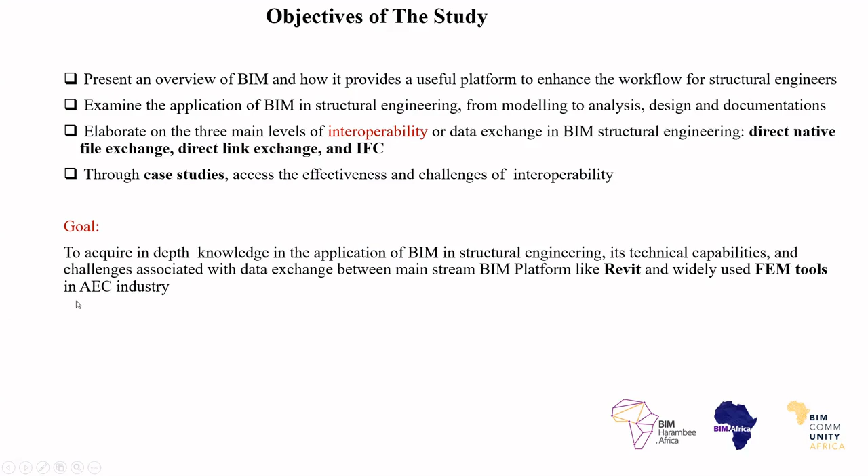Through the case studies, we will assess the effectiveness and challenges of interoperability. The goal of the project is to acquire in-depth knowledge in the application of BIM in structural engineering, its technical capabilities, and the challenges associated with data exchange between mainstream BIM platforms like Revit and widely used FEM tools in the AEC industry — AEC representing architectural, engineering, and construction.

Methodology: the methodology is based on data exchange. So what are we going to do? We are going to see how to build a Revit model from a structural engineering point of view, or how you get a model from an architect as a structural engineer, and pass this model to a FEM solution or structural design software like SOFiSTiK. We use RFEM and SCIA Engineer to demonstrate this.

What method of interoperability are we going to use? We use the direct link, meaning these software are directly connected to Autodesk Revit. So within Revit, on one platform, you are able to perform multiple analyses. This is really beautiful, the beauty of BIM. Previously, this was not possible. This is the methodology used in this project and how to move from one place to another, as you will see as we go along.

And what is BIM? A lot of people have already spoken about this, so I'm not going to waste a lot of time on it. There is a specific definition of BIM that is very catchy, attractive and innovative, and it encompasses all of the definitions of BIM in just one paragraph or sentence.

This definition is proposed by Jerry Laiserin, a building information modeling enthusiast, who says that BIM creates and maintains in real time multi-dimensional data-rich views through a project's lifecycle to support communication. BIM helps to support communication. What does that mean? It helps to share information, so I share my information with the architect or the MEP engineers or the facility manager.

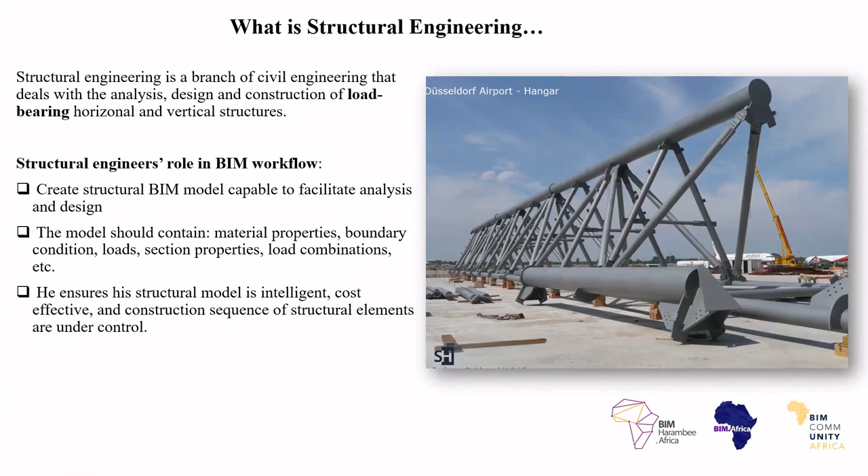He will be the one who creates the structural model capable enough to facilitate analysis and design. His model should contain key structural parameters like material properties, boundary conditions, loads, section properties, load combinations, etc. We'll talk more about this later. He should ensure that his structural model is intelligent, cost-effective, and that the construction sequence of the structural elements is well under control.

Having said that, this is mainly his role in the design process. He can get the drawings from the architects, takes the drawing, and then based on the structure he wants to design—whether it's a concrete structure or a steel structure—he analyzes the materials and assigns material parameters and properties to it based on the code.

With his knowledge and experience, and also the situation where the structure is located, he's able to assign loads and analyze these loads through mathematical models and formulations. He is able to define or determine the internal forces—these are internal forces such as the moments, the shear force, the normal force, and the torsion or torque. Once you do these things, they are done through analysis in the software.

Sometimes it can be done through hand calculation, just as a backup. Then you will need to do verification. Some verifications of the structural elements will be done. These verifications are like designing your structure.

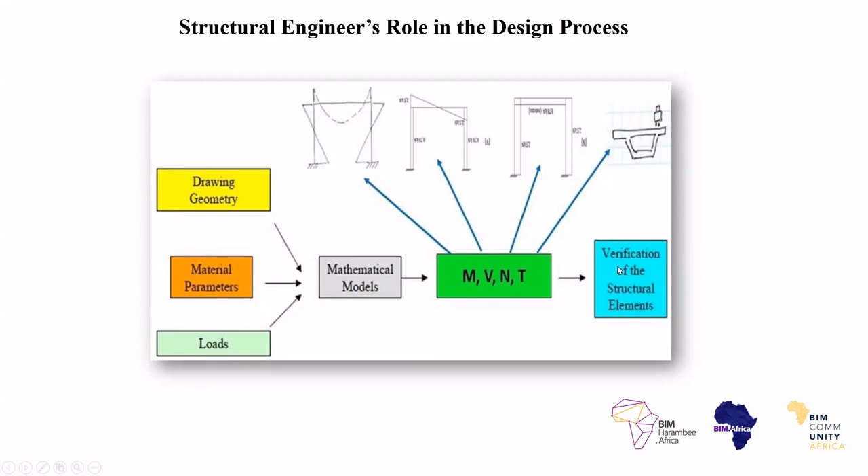Structural design is like resistance versus action. If you push me, I should be able to put up enough resistance—my resistance must be more than your action. Once my resistance is more than your action, it means my structure is well fit. So he compares the resistance against the action, and the resistance must always be greater than the action. This can be verified through the codes, through experience, through training, teaching, and everything.

Before we go further, the last thing we would like to define and clearly understand is FEM, finite element modeling—the word finite meaning small particle. This is at the heart of structural calculations and analysis. All of the computer programs you see are based on finite element modeling. FEM is one of three methods structural engineers generally use to determine internal forces and moments of a structural system.

Generally, there are three main methods. There's the force method, used to determine internal forces or displacement of the system. You have the displacement method, which is the FEM, and you have the reduction method, which is also based on FEM. The displacement method is the backbone of most computer software—the tools you see out there are based on the displacement method.

So a good number of structural engineering software tools are based on the principles of FEM, or finite element modeling. So it is very important—that's why it's very important—for a user of the software to understand the underlying principles behind the governing equations, the mathematics, and the mechanics of how the structural software computes internal forces using FEM.

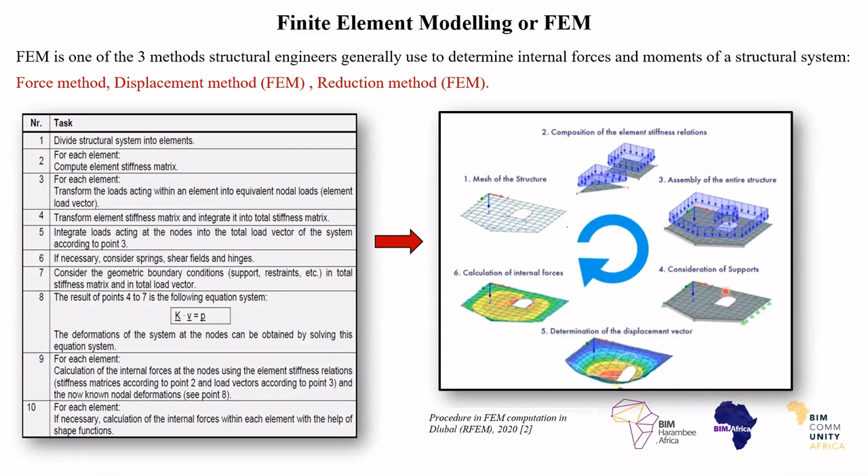So basically, this is just a little overview of finite element. To learn about this requires a huge amount of time, this takes a whole semester to learn in universities. So normally, people in structural engineering, mechanical engineers, even sometimes electrical engineers, most of their calculations are based on finite element method. It's a very wide field.

Then we would like to talk about interoperability. This is very important. What is interoperability in the midst of all of these we are discussing here? Interoperability, as the word entails, what is it? What kind of system? What kind of interoperability? How is it achieved?

Let's look at the word itself, not the definition, but just the word interoperability. The word inter means between two groups. Operability means things are able to operate, in just a literal sense. Another way to look at it is the ability to keep a piece of equipment or system, or the whole industrial installation, in a safe and reliable functioning condition according to predefined requirements.

So when you combine both, you get this definition presented by the ISO standard, which says the ability of two or more systems or components to exchange information and to use the information that has been exchanged. It's not just exchanging the information, I must be able to use the information that I exchange. Otherwise, it's irrelevant. When an architect gave me his model, I should be able to use that model to alter the models and do my structural calculations. If I cannot, then interoperability does not exist.

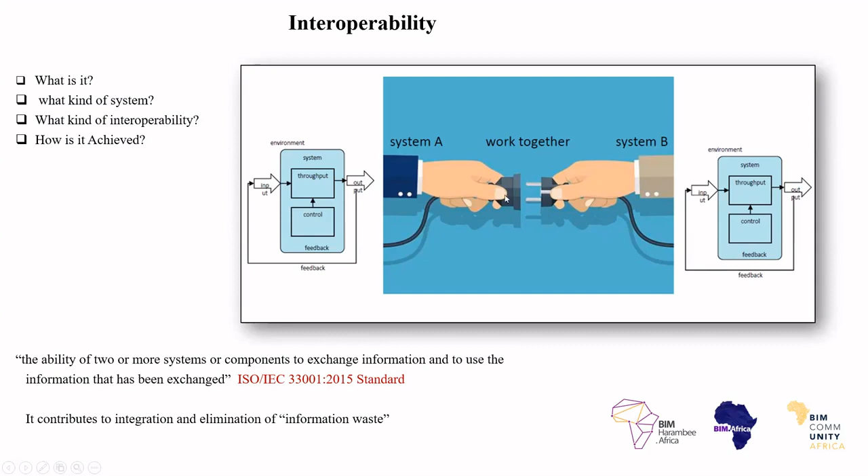It should contribute to integration and elimination of information waste. So as you can see here, system A works together with system B, and they are able to exchange information and they use that information.

Interoperability is a generic term. Every domain, every discipline has a way to define what interoperability really is. It depends on how you look at it. For BIM structural engineering, we're going to look at the various levels of interoperability later on, but it has multiple dimensions, like 3 dimensions: the kinds of methods, the kind of system, and the kind of interoperability.

The kind of system we'll be talking about is non-technical interoperability and technical interoperability. Technical interoperability will be information system, that's the classical one. And the non-technical one would be like business, interoperability between business, organization, project, people, how they operate.

And maybe the next one, the kind of interoperability, has to do with semantic, the data connection. This is what we will be talking about more, how to exchange one data, the structural data, the syntactic, the connection data, and all of this.

And the kinds of methods has to do with which method you use to achieve interoperability, like openness, machine readability, industrial standards like the IFC, like the PDF documents you use. All of these are methods that give you interoperability. And then you have the ISO STEP physical files and all of these.

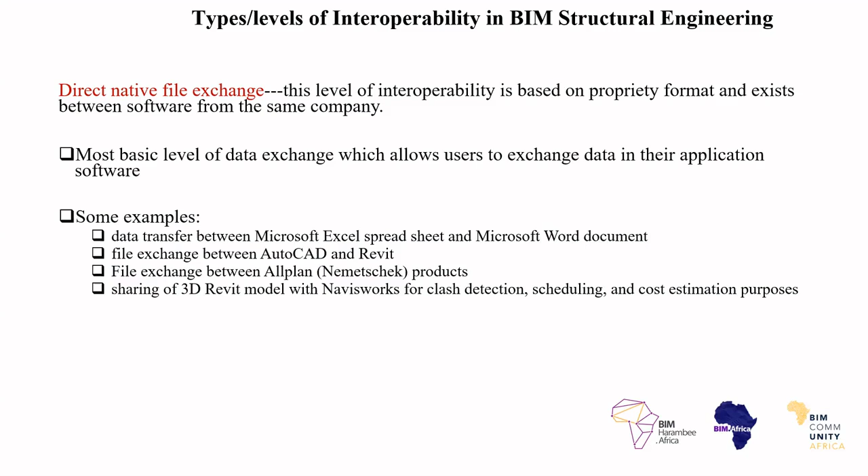And this is the most basic level of exchange, which allows the users to exchange data in their application software. But one of the main disadvantages of this interoperability is that it requires a repetitive process, which makes changes to the models very difficult. And at this level of interoperability, when you have a huge project, it's really a problem. So we go to the next one.

The next one is the direct data exchange, which is the bidirectional or round tripping engineering. This is very good. This is the one where the structural model data is directly shared or exchanged between a BIM authoring tool.

Let's underline this word, BIM authoring tool, and an FEM software tool. What is that? BIM authoring tools are something like Autodesk, Tekla, maybe Tekla and ArchiCAD. If you are able to take your model from one of these and send it to an FEM or structural engineering software and perform analysis, what you are doing there is direct link data exchange or round tripping. You're going to see a lot of this in the case study.

This is the backbone of this research. This research is trying to analyze, to understand the advantages and disadvantages of this method to a structural engineer, the fidelity, how important when you exchange the data, how this data can maintain their fidelity, that they are not able to be compromised. We're going to see this later.

Studies have shown that this level of data exchange is the most effective and efficient method for BIM structural engineering up to date. It provides an interface for two independent software programs to exchange construction data in real time. This is really good. You're going to see this.

Some examples are when you exchange your data Revit to Sofistik, Revit to Tekla, Revit to Dlubal, which is RFEM, Revit to SAP, Revit to Autodesk Robot, Revit to SCIA Engineer, Revit to Allplan, for example, or ArchiCAD to any of these. When you do that, you are talking about direct link data exchange.

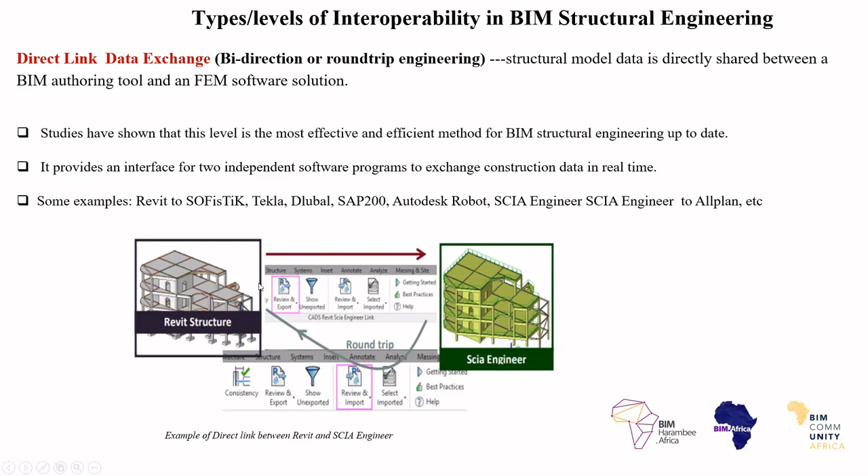For example, as you can see here, you have the Revit model, and then right within the Revit platform, you exchange the data to SCIA Engineer and perform your analysis. You are able to bring your data back, query it, make some changes, and bring it back again. This is what we call round tripping. We will see more of this.

And then the next one we talk about, which has been highly discussed by most people, is the IFC, which is the Industry Foundation Class. This is an open standard system that promotes vendor neutral and usable capability across a wide range of hardware devices, software platforms.

This one is basically like sharing my file with someone else who also has a BIM tool that is able to read this file. This one is neutral. You don't need to buy anything, just exchange your data. This is developed by the International Alliance for Interoperability. The open nature of the IFC allows the file to be read by any CAD software which has the IFC export and import functionalities. And this is really good.

This is good for coordination, especially for the structural engineering part. The disadvantage of this for the structural engineer is that IFC is mainly used for coordination purposes, but not for structural analysis because of its low capabilities in transferring structural properties and data.

Yes, I can use my structural model and convert it to IFC and send it to the architect in my office or in other companies, or to the contractor. He can only take the model for coordination purposes. But when he gives me his model, for example the architect's model, I'm not able to use that model to perform structural analysis in reality, because the IFC doesn't really work well for that. There's currently still a problem, and this research was able to unveil that there's still a problem with the load combinations.

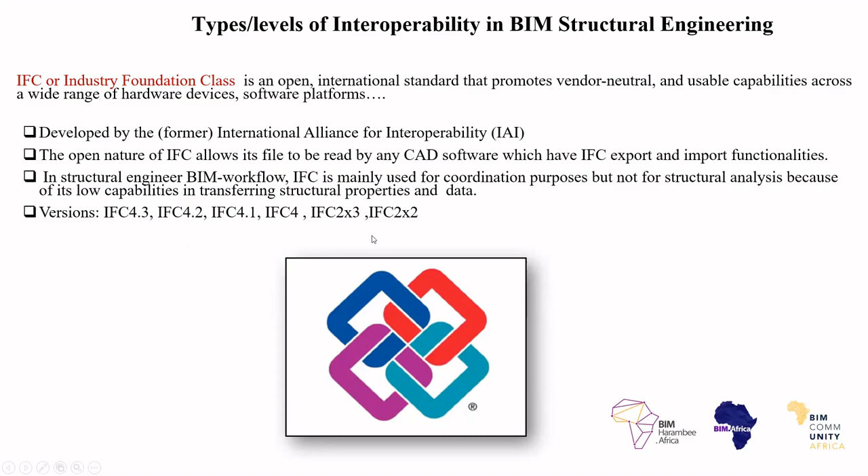We're not going to go into all of this detail, but this is an example of IFC file exchange I did some time ago. This is a frame system. I did it in Revit, then converted it to an IFC file, and went to ArchiCAD to see what happens. I exported it from Revit and opened it in ArchiCAD. This is what happens.

This is what I saw. As you can see, if I was exchanging this with an architect, he was going to be able to see it, and I could tell the architect, oh, there's a problem with the column, the thickness, there's a problem. Then the architect could make the changes and send it back to me. When I see that change, I can modify it and do my structural calculations without the IFC anyway. So this is just an example.

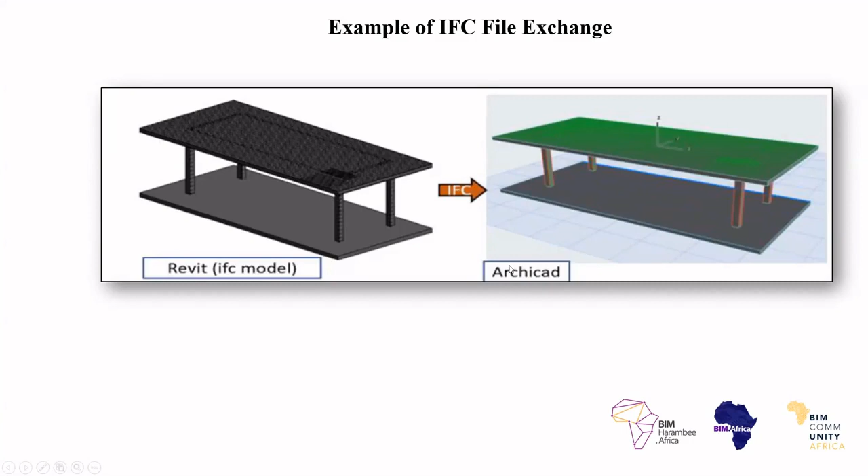So this is what happened. There has been significant improvement in data exchange in the AEC industry. Could you imagine this chaos? These bidirectional exchanges between architects and structural engineers, you change it, send it this way, bring it back - this is really chaotic. This was some years ago. But now with BIM, open BIM, IFC, everything has been synchronized and integrated. You are just able to have one database and exchange all of this information. Very good stuff.

BIM in structural engineering - there are BIM uses. What is BIM use? BIM use refers to the way in which the concept of building information modeling is applied or used in each specialist domain within the project life cycle. The way an architect uses BIM is a little different from the way a facility manager will use it, and a structural engineer will use it.

The way you use it - maybe the architect uses BIM for energy analysis, maybe he uses it for facility management. The guy in facility management uses it to keep track of the facility.

The structural engineer's BIM uses - as identified, there are many BIM uses, but we are able to identify three key BIM uses for a structural engineer: one is interdisciplinary coordination, project documentation including producing construction drawings, and structural analysis and design through third-party analysis, plugins, or direct link.

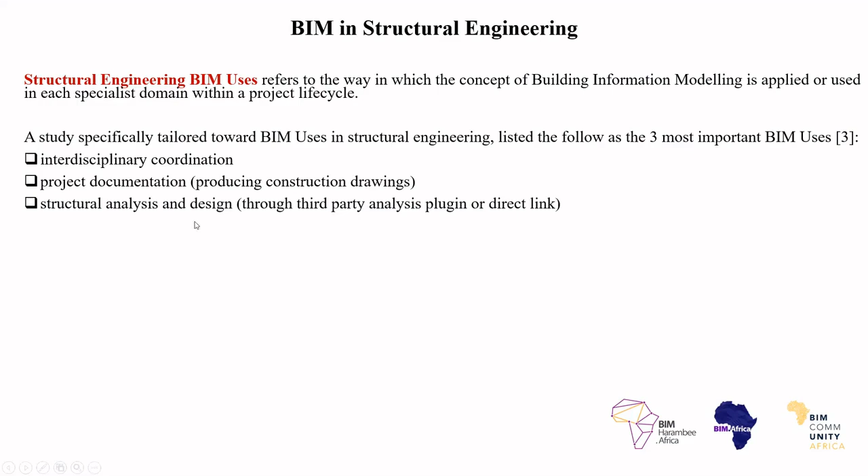For structural analysis and design, we're going to see this - this is going to be our focus. You're going to see how this works.

And structural BIM models - there are two types of structural BIM models: the physical model versus the analytical model. The structural BIM model is the central data that you establish in Revit or in ArchiCAD. In Revit, you build your models and then populate your models with data - for example, your column and everything, your beam, your slab - you have all of your metadata, all of the information about that column. Anybody who comes and clicks on it can see all of that information. This is all the central data, which is the structural BIM model.

But then what will be the physical model? The physical model represents the exact geometry of the structural members.

It is a model void of the architecture and MEP elements of a BIM model. That is, when you take away the MEP, the electrical and mechanical components, and from the architect side, you don't need the windows or the doors as a structural engineer. All you need is the structural elements, the physical component that you're going to do your analysis with. That's the model left when we extract the load bearing structural components of the structure.

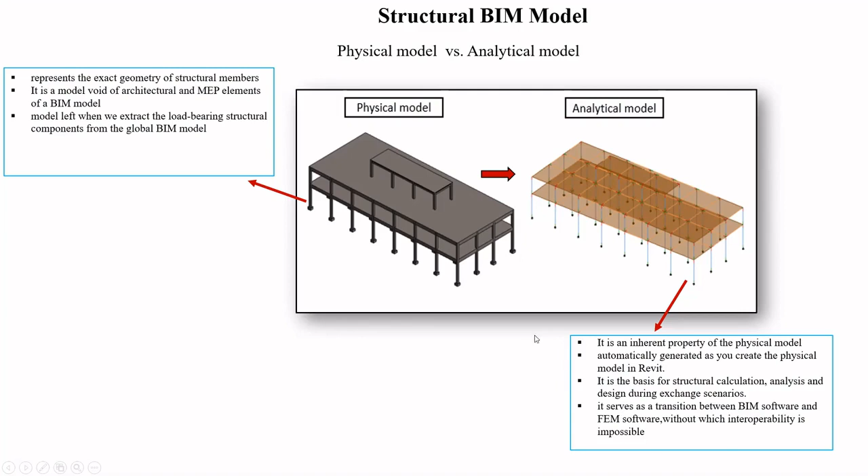In Revit, when you are creating the physical model, you have to be cautious and use the template. When you use the structural templates in Revit, as you are creating the physical model, it is automatically creating the analytical model. And it is this analytical model you're going to use to perform your structural analysis, and this is what you're going to transfer to the FEM software or the structural engineering software. So that's why we say it is the transition between the BIM software and the FEM software. Without this, interoperability is impossible. It is the basis for structural calculations, analysis, and design during the exchange.

Then the next thing we want to talk about is structural engineering BIM workflow. The workflow, how do you perform your workflow? How do you start, what do you start with, continue with, and end with? Normally there are a lot of workflows out there. Your company or institution can establish their own workflow, but basically from the structural engineering point of view, this is how it is, so it's just a modification of it. And this is exactly what you're going to see in BIM.

Mostly, you will create your BIM model of the structural elements. From that BIM model, the physical model will be created in Revit. And then from that, automatically, you have an analytical model available for you where all your loads and materials are added. You transfer it to an FEM model, the finite element software. In this model, you are able to perform analysis and design.

Analysis and design are two different things. Analysis is when you compute and calculate the internal forces of the structural element. These are analysis, and then you see what the internal forces are, what the stresses are. Design is when you use those internal forces to design that particular element, for example the slab or the column. You are using the code, and the software is also able to compute that, but then you have to follow specific code guidelines on how to do the design of that structure.

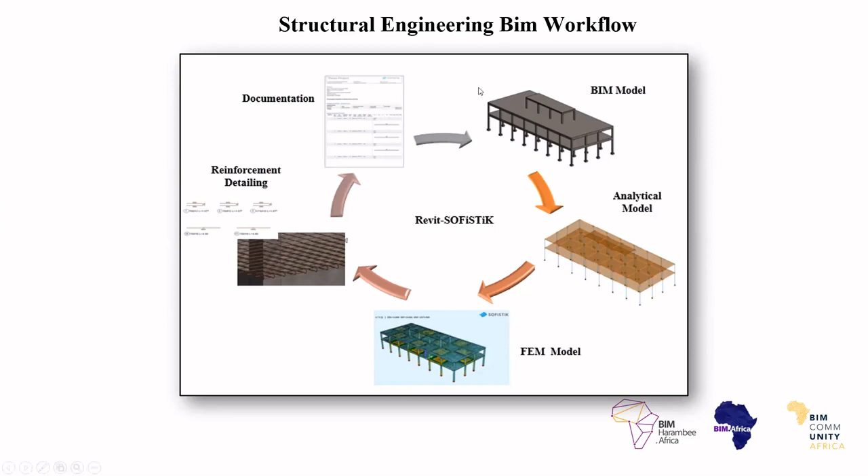When you are done with that, what do you do? Reinforcement generation and detailing, as you can see here. With the reinforcement generation and detailing, you are able to document, do your schedules of reinforcement so that you can send it to the fabricators, or have an idea of your quantities, material takeoffs, and everything. And then the documentation is provided. This can be provided in the cloud, or you can send it to the fabricator for steel, or to the contractor to see what's going on. So this is really, really good. Everything is in a cycle with an integrated model, so you can see everything.

And we will talk briefly about the BIM business process map in BIM structural engineering. This is a business process map. The business process map in the BIM industry typically tells you where, what, how to proceed with your use of BIM. So the process map for this is a process map for a structural design company without BIM. When there is no BIM, see how chaotic it can be.

You get the information from the architect, give it to the senior engineer, and the senior engineer translates it to the junior engineer, and the junior guy translates it to the designer. The designer sends it back to the senior engineer for some modifications, and after all the design, they send it down to the foundation engineer, because the foundation engineer will need the reaction forces from the entire structure to design his foundation. So he has to wait for these guys to finish.

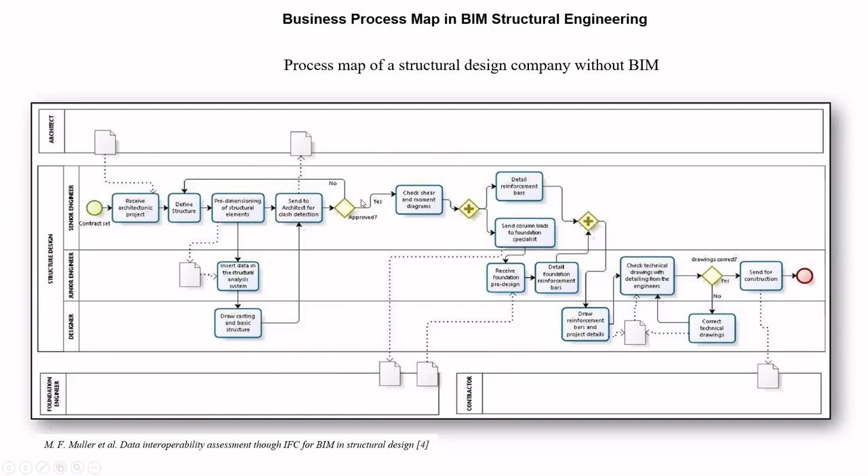So you can see this process, how it's a little bit difficult, but with BIM you have a central data repository. Everybody can see what's going on here, we can work from the repository. The foundation guy can be waiting while this guy completes, but at the same time he's able to determine what's going on and predict how his foundation system will be analyzed. Everybody is in the middle with this BIM repository working with it. This was developed by M. F. Muller in a project data interoperability assessment, but we made some modifications to this.

So the benefits of BIM in structural engineering: we're talking about productivity. Obviously, when you have an integrated system working, you're able to synchronize and you don't have to repeat things. That automatically relates to productivity. Coordination and consistency of data - your data will be streamlined and consistent. You already know what is in, what is out.

Visualization and simulation from the structural engineering point of view. As you see here, you're able to see clearly. I can visualize my reinforcement, I can really see the spacing of the reinforcement - this is really important. And I can simulate my structures to see the behavior, to understand the behavior. Documentation - the projects can be documented in just one system.

In the repository, we are able to document and exploit the analytical model that will be the transition from the BIM to the structural engineering software. BIM is also creating the platform for third-party developers and downstream innovations, like something such as Dynamo. Dynamo, now, when you have a complex geometry, you can use Dynamo, you can use Grasshopper, you can use these tools to prepare the geometry and then send it to Revit, and then do your analysis with it.

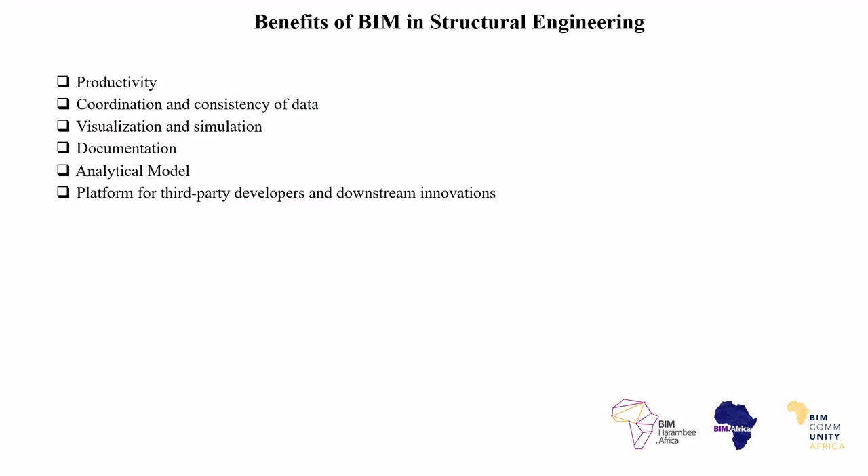And there are many downstream technologies coming up, like SCIA Engineer for structural engineers. It has something we call auto converter - you can convert your structural model automatically, and then you're able to identify mistakes and things. So many things going on there.

Yeah, challenges. Obviously there are some challenges. You have time and resources challenges, and complications with structural engineering - it's a challenging field. The structural engineer must have a good understanding before implementing BIM, otherwise you cannot just have somebody building geometries and models and call it a structural model. If it's not corrected from the beginning, it's going to be really difficult dealing with that, and there's no need for BIM if the model has many errors. It needs constant modifications - yes, you require the knowledge to avoid all of this. Too much knowledge is required.

Analysis links - yes, most of the links work to connect BIM to the FEM software, the structural software, but some still have some problems. These are challenges. It's still not yet seamless.

So we will be presenting 2 case studies, based on direct link interoperability. As I mentioned earlier, we have 3 types of interoperability in BIM structural engineering: native file exchange, direct link interoperability, and IFC. But this project tries to understand the efficacy, the effectiveness, the fidelity of the direct link interoperability - how is it when I put my model in Revit software and send it to a structural engineering software, how does it work? Does it receive all of the data correctly? This is what these 2 case studies are about.

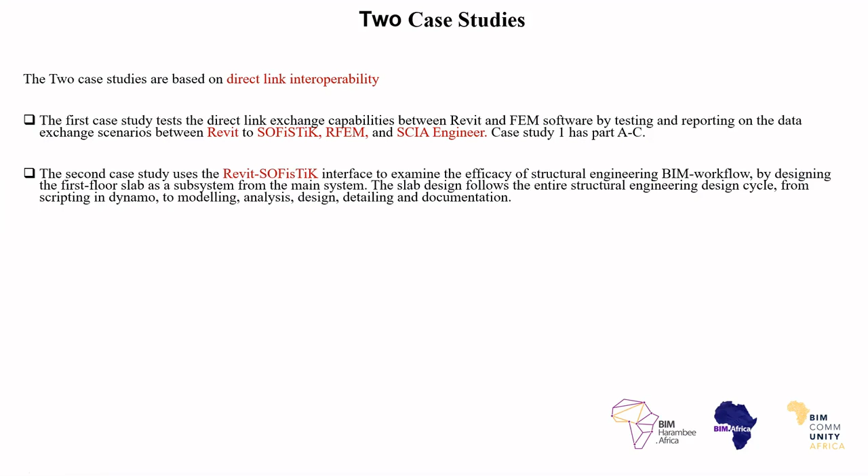So does BIM really work? When you place BIM in the design cycle, does it work? We want to see that. This study wants to try to uncover that. And this is a case study.

It's an office and industrial complex designed for the cigarette manufacturer Philip Morris in Bologna, Italy. The case study was provided by Politecnica Ingegneria e Architettura. They provided me the data, all of the materials to perform an analysis. This building was constructed in 2013 or 14, a few years ago. It is currently in use.

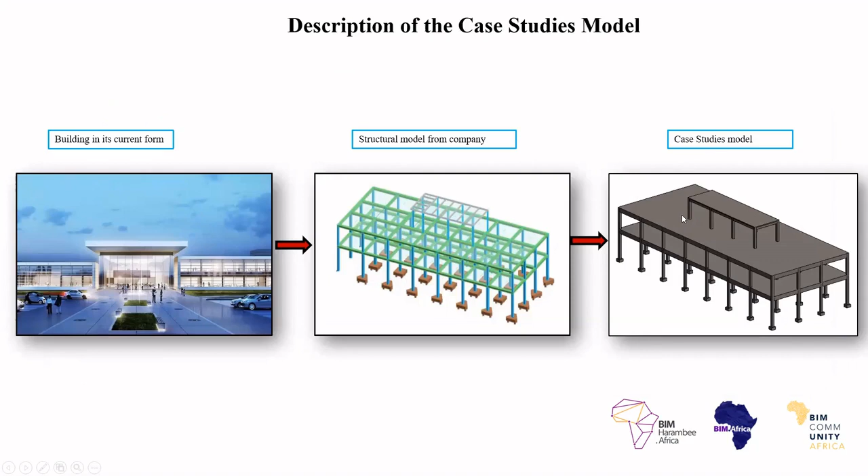This is the building as it is, and this is the model the company created in SAP. They use another software, SAP 2000, and I use another software. This is the case study model I developed in Revit. Later on, I change it with other FEM software, as you will see.

Case study one, from A to C. A has to do with Revit to Sofistik. B, Revit to RFEM. C, Revit to SCIA Engineer.

So what I'm going to do is the Revit model is here, and we exchange it with Sofistik. We observe, we see the changes, whether the Revit model is able to directly exchange this data with Sofistik, and how Sofistik receives this data. What happened? Was there any change? If I take the model from Revit to Sofistik, am I able to use that model? Is it sufficient if I take the model back to Revit? Is it okay to make additional changes and bring it back? What is happening there? We will see in these case studies.

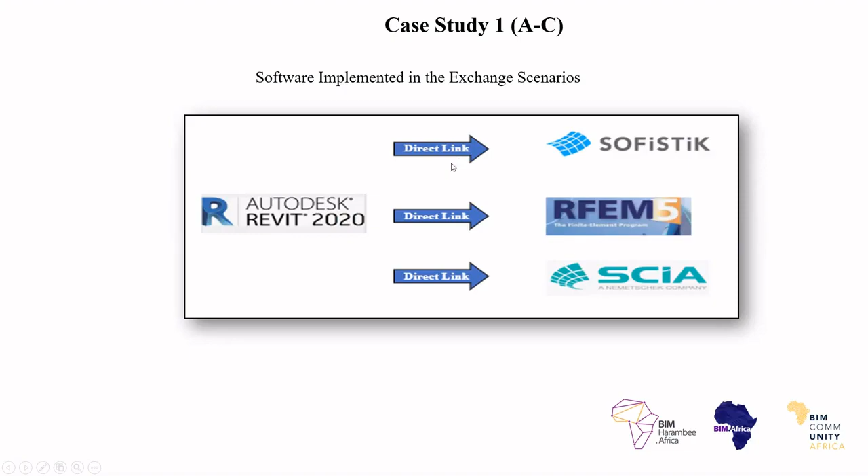This is the basis of this study, as you're going to see along. That's why you have a direct link. We use the direct link. It's not native file or IFC.

Load and boundary conditions populated in Revit. In Revit, as I told you earlier, this is the analytical model, which is the transition. It is this model we're going to send to the FEM software. Now, as you can see, the analytical model is ready with all of the loads applied to it.

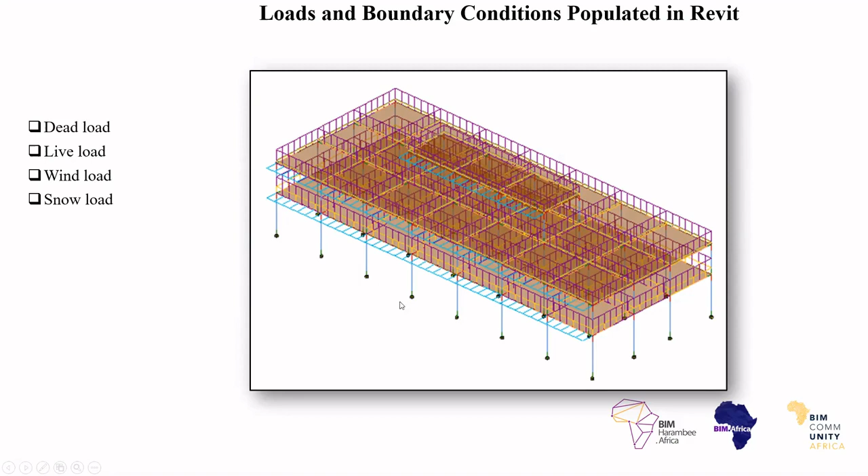But before that, we have to do load combinations. And the load combinations we do are at ultimate limit state according to EC2, which is the Eurocode 2. I did 24 load combinations.

What is load combination? Load combinations in structural design is when you want to design a structural element - this is uncertainty. So you assume that with this structure, so many series of loads will act at the same time, or some loads will act, some will not be present. So you combine all these scenarios like a probability. What's the probability that when everybody is in the hall, what happens? How does the building react? What's the possibility that half of the people in the hall, what happens to the structural element?

The Eurocodes provide provisions to combine all of your loads. When I did a combination, I came up with 24 load combinations, for when the dead load is there, the live load is acting, and then you take a fraction of the accompanying load, the snow or the wind, when the live load is acting. So this is the general formula.

The G stands for dead load. The P should be, I think, pre-stress, but we don't need that. And then the Q is for live load. This part of the live load has to do with when you have a live load and then a wind load or snow load acting, you have to take a fraction of it, so the combinations act together.

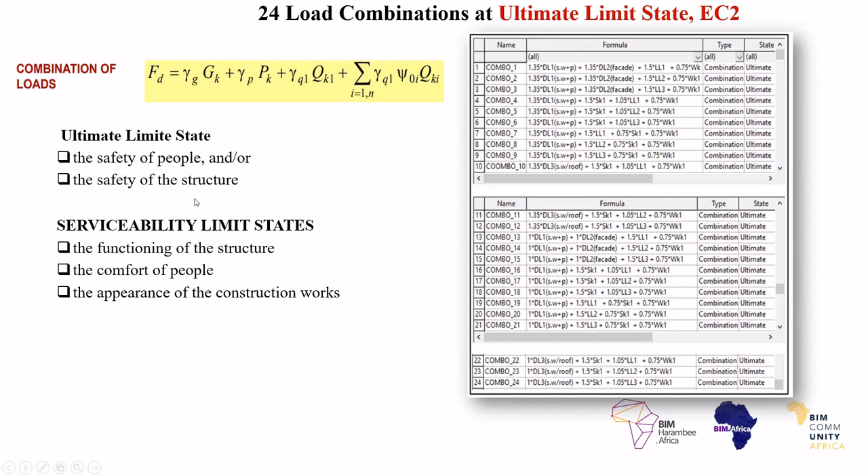If you look at a tall building in New York, when there's wind, this building should not deflect too much. This, you are looking at serviceability, the functioning of the structure, the comfort of the people. The building should not shake, or the bridge should not shake too much. The appearance of the construction works - all of these are taken care of in serviceability limit state. So when you are doing the structural design, these are the two conditions you will take care of. There's not much time to really go deep into this, but this is just the basic.

Case study one: what we try to do is direct interoperability, the direct link data exchange between Revit and SOFiSTiK. We work with Dynamo, move to Autodesk, create the model in Dynamo, move to Autodesk Revit to populate the data, put more materials into the data, and then we create the central BIM models in Autodesk Revit. Then we take the model from Autodesk Revit, use the physical models, which are converted to analytical models, and send to SOFiSTiK for design.

What are we interested in? These are the data in this process. Does the structural model exchange properly - the material properties, the boundary conditions, the load cases, and load combinations? These are the things that are necessary for this, for FEM calculation. If we are not able to transfer these from Revit to SOFiSTiK, then your calculations will not go ahead. So we are interested in understanding how the software interprets these important structural data.

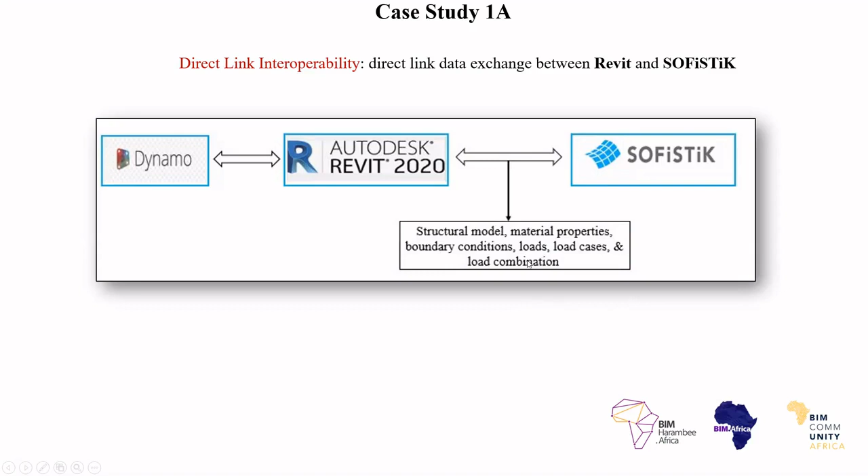These are the relevant structural data to a structural engineer. This is why IFC has some problems when you want to perform a structural analysis using IFC, because sometimes some of these data are not transferred properly.

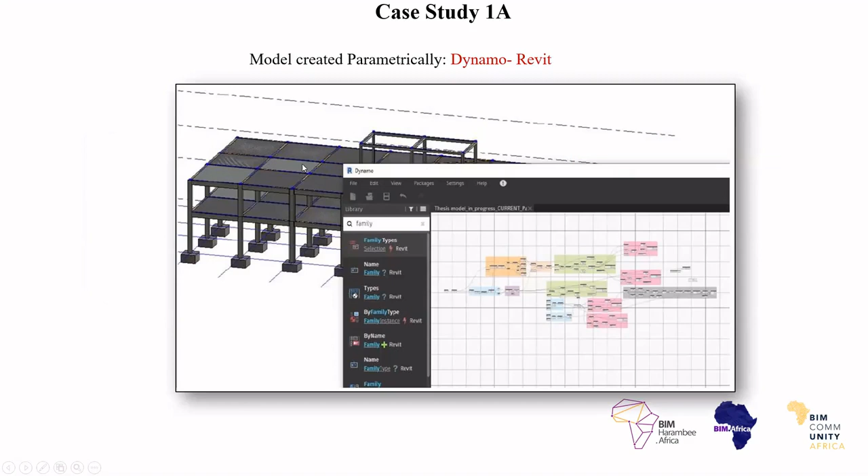So this is a Dynamo script. As you can see here, I created it here, and I was able to automatically generate this model here. And this is the Revit SOFiSTiK direct interface panel in Autodesk. So this is the SOFiSTiK panel.

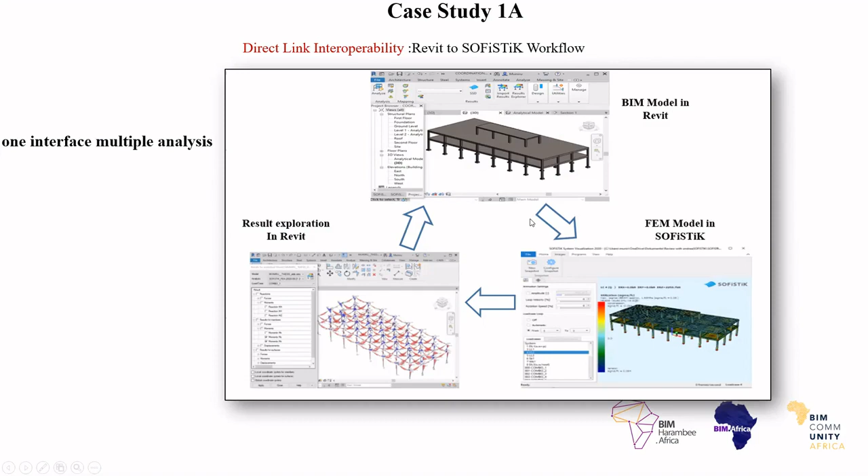As you can see how cool it is. Before, this was not really possible. In one interface, you can do multiple analysis. You don't have to create parallel files. You don't need to have two files here and there. Everything is synchronized in one system.

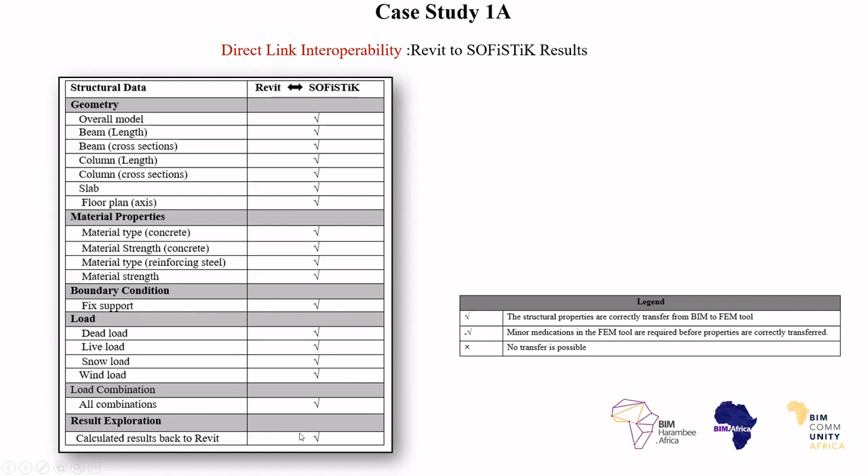So we come to the geometry, we were able to transfer everything, Revit to SOFiSTiK. Material properties, Revit to SOFiSTiK, everything was correct. The boundary conditions, correct. The load cases, all of the load cases were transferred directly as it is in Revit to SOFiSTiK. The combination of the load, as we did it in Revit, it is in SOFiSTiK. And then we are able to calculate the result back to Revit, bring the result back and analyze it. It was done correctly.

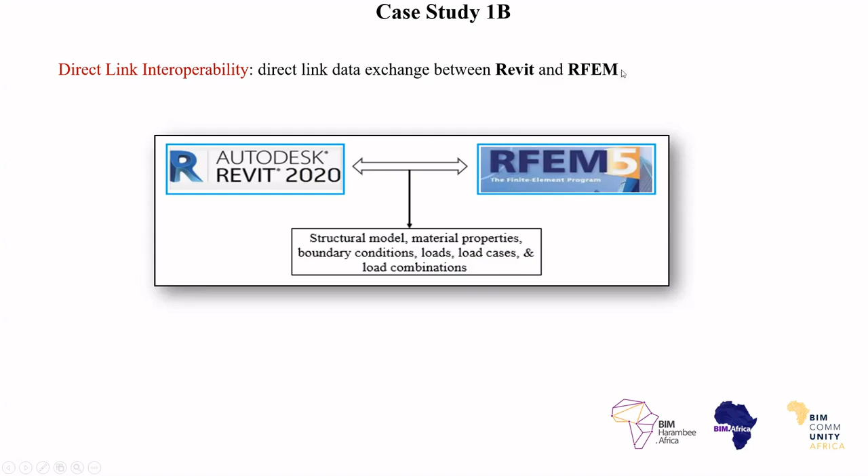So that was for Revit to SOFiSTiK. Now Revit to RFEM. RFEM is a Dlubal software. The name of the company is Dlubal, but they produce RFEM for finite element analysis. So Revit to RFEM, the same data of interest, all the same data we use in Revit to SOFiSTiK. How does RFEM receive them as well?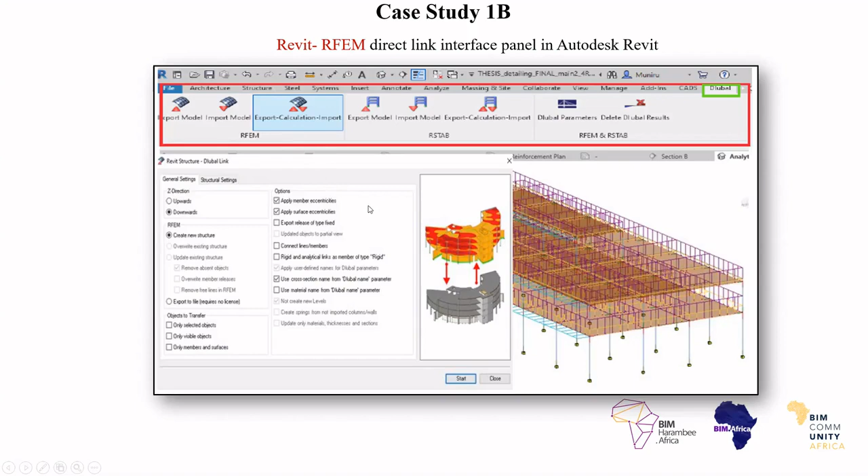This is really good, but then you have to do some settings here to make some modifications.

The workflow, Revit to RFEM workflow. As you can see here again, the same. We have the model here, we send it to RFEM. This is how it looks in RFEM, very beautiful colors. We do the analysis and design, and send the result here again, and then we come back here in the cycle. When you bring it here, if there's a problem, you are able to take it back, change it, and bring it again. One interface, multiple analysis, result.

Again, the geometry was correct, the transfer, the beams, the columns, the slabs, everything. The material properties were done, but there's a problem with the material strength. In the case of RFEM, you need to make little modifications. You have to set, before you do the transfer, some changes so that the RFEM materials are able to receive the Revit material. There's some little modifications, it's minor, it's not really complicated.

But the material strength for reinforcing steel was not clearly defined. It was not exact as in Revit. So it was wrong there.

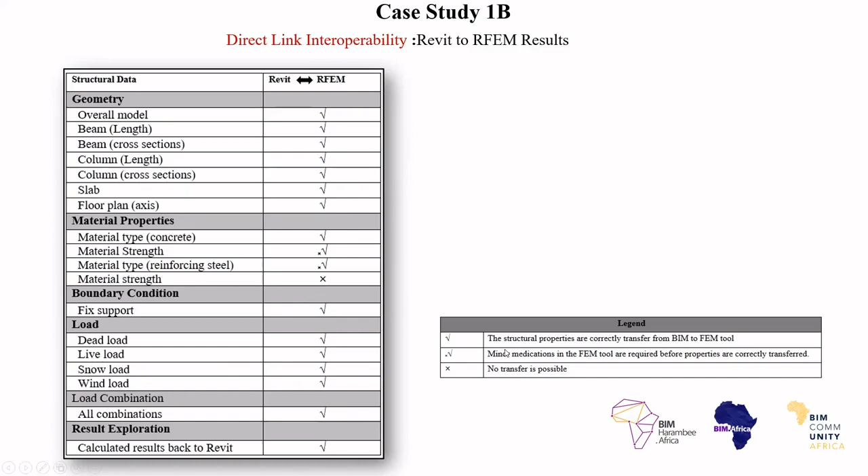And everything was correct. So this is the result.

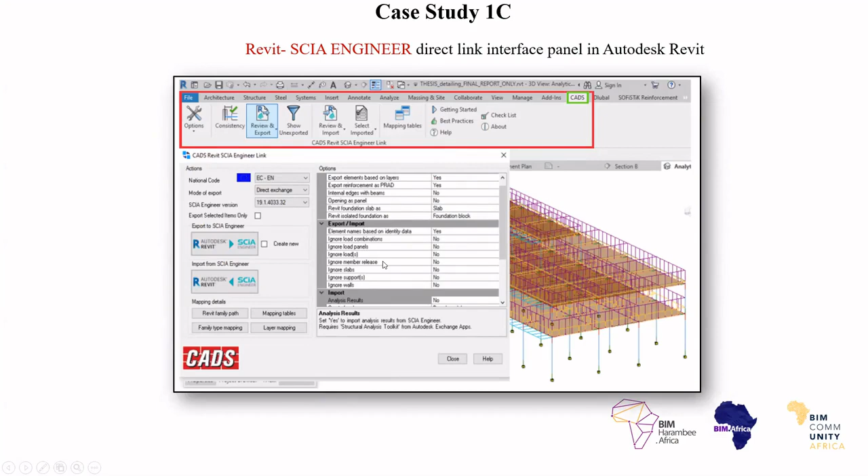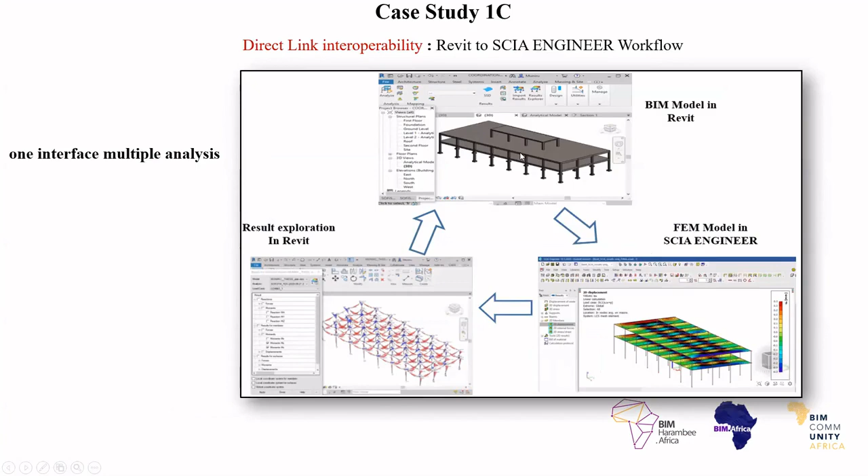Again, Revit and SCIA Engineer, another one. We do the same process, the same data. You can also go on SCIA Engineer's website, get a student version, or a 30-day free trial, and install it on Revit. This is a platform. It's going to ask you which code you want to use, which exchange you want to do. The same process: Revit, FEM model in SCIA Engineer, the result exploration, back to Revit. One interface, multiple analysis. The result, the same.

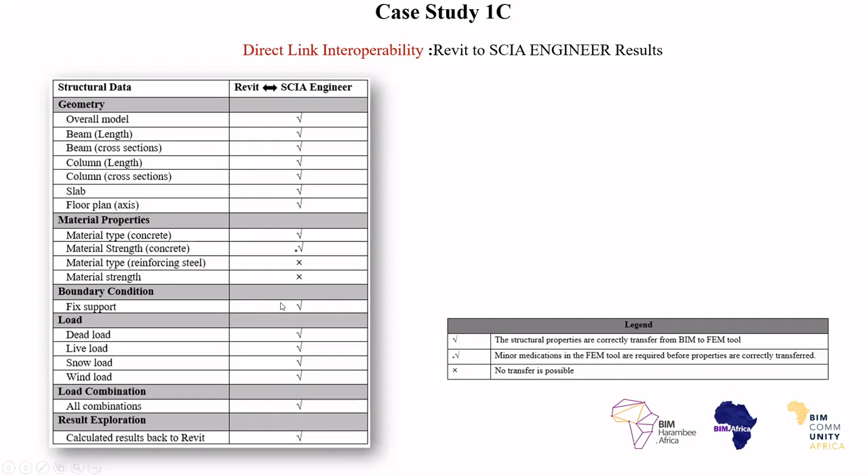But the material strength is the same, you have to make some changes. First, in SCIA Engineer, before the analysis is correct, but I was not able to get the material type for reinforcing steel and the strength to be received directly as it is in Revit. They have their own naming system, so that was not correct. That's why you had that issue, but the rest was okay. I mean, all of the software, okay.

So comparison of results: as you can see, when it is correct, it's one mark. If it's half, you get 0.5. Not at all is 0. So I do this comparison, Revit to SOFiSTiK for the geometry, 100% from all three analyses. For material properties, SOFiSTiK got 100%, Revit RFEM got 50%, Revit SCIA Engineer got 37.5%. For boundary conditions, all are correct. The load cases, all are correct. The load combination, all are correct.

The calculation result, when you take the result back from the FEM to Revit, all went well. So finally, Revit was 100%. That means with Revit to CI to SOFiSTiK, you are able to perform an entire BIM analysis and do your structural engineering design in one platform. Very cool, with no problem, 100% fidelity. And then RFEM 90% is also okay, very good, you just need minor modifications which don't take more than 10 minutes. SCIA Engineer got 88%, there are still some modifications going on, but all is okay, all is very okay.

Now with this result, this is why Revit and SOFiSTiK are interested in my research, and this is why these companies do this kind of research. They want to understand how their software are working and get feedback to make improvements. So this result is being shared with SOFiSTiK, and also all of the software companies. They're going to see it, and they know now what are some of the problems, what they need to improve on.

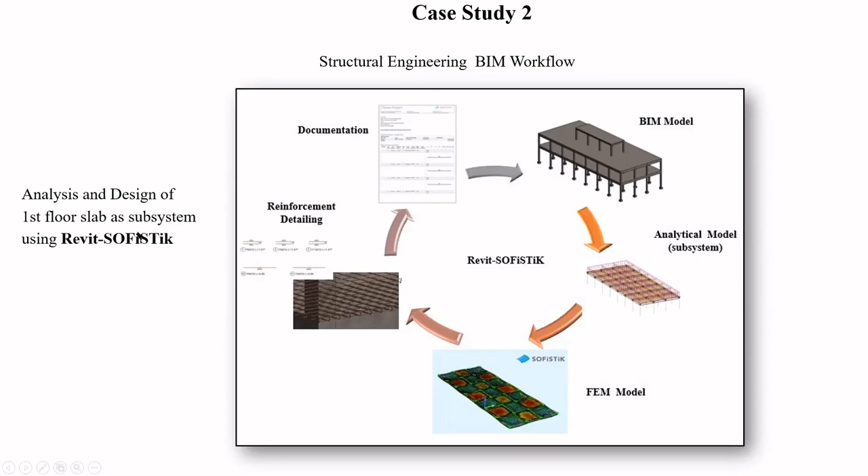So we get the BIM model, we get the analytical model. As you can see this time around, this is a slab of the first floor. We extract it, analyze it in the FEM, then do the reinforcement detailing, and then do the documentation - the analysis and design of the first floor slab as a subsystem using Revit and SOFiSTiK.

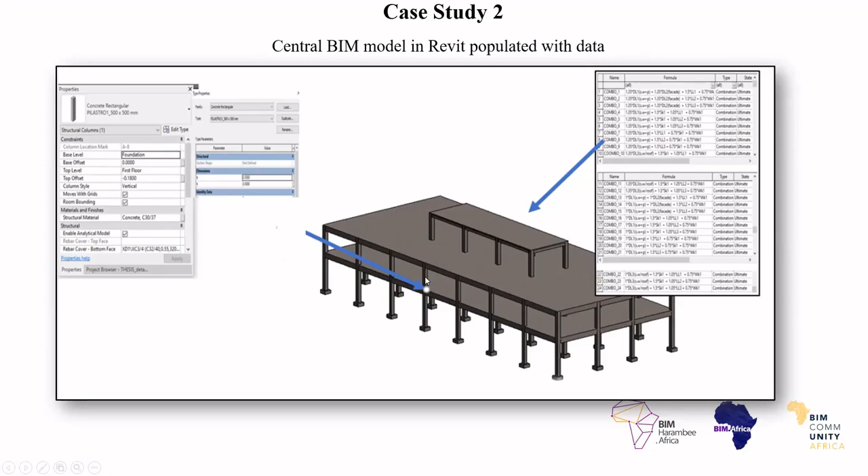Analytical model - this is the slab of the first floor with load. The loads are acting on it, and this is why we transfer to the FEM. FEM system, now you see this is the analysis. What you see here, this beautiful coloration, is the live load. So we do the alternative live load design, where we assume the live load is here in the middle of this room and these rooms are empty, then we assume the live load is here, this one empty, here, here, until we see the effect of different scenarios.

There was another scenario, the live load is on all of the floors. There is another scenario where the live load is alternating, so that you can see the worst effect to do your design.

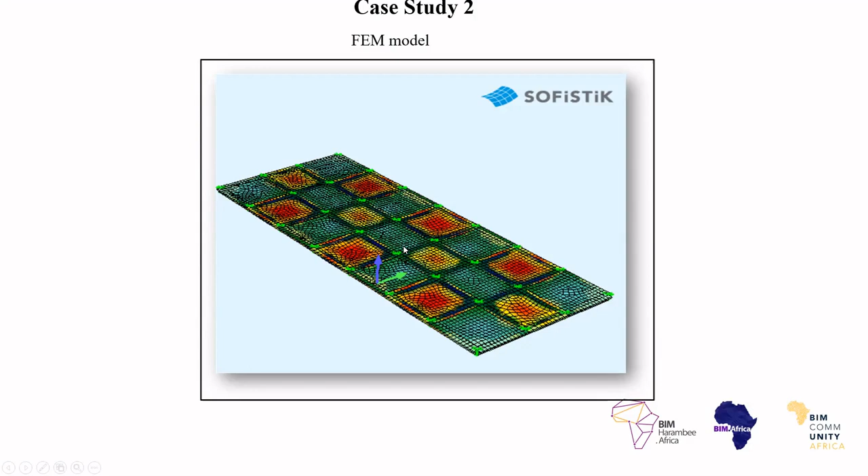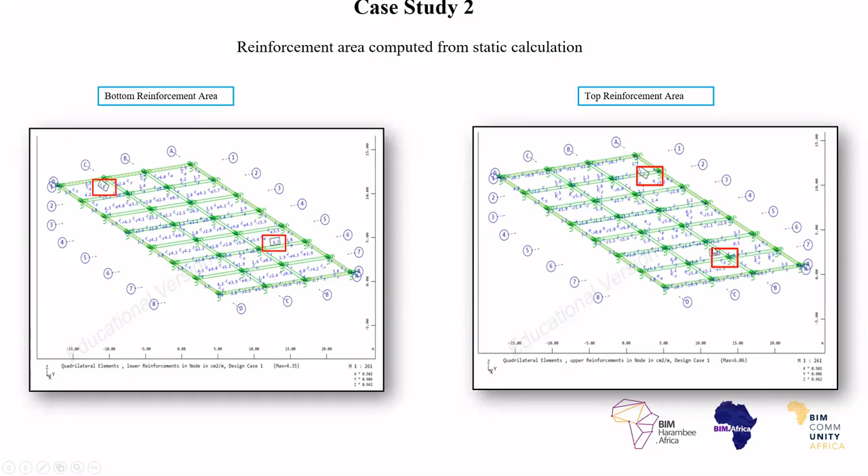So with this, you see everything. Because we have the maximum reinforcement for all, we decided the top and bottom reinforcement would be the same. This is a case study, we don't need to go into special detail, so we just use one reinforcement area. Normally the reinforcement area is in centimeter square per meter. The maximum is 6.3, and we use that 6.3 to proceed.

We chose diameter 16 bars with a spacing of 300 millimeters. For every side, the top reinforcement and the bottom reinforcement, this is what we provided, and you are able to see everything. This is really, really cool. Some years back, this could not have been possible.

With this, we are able to generate the 3D reinforcement. Now you can see the 3D reinforcement. From the 3D reinforcement, we can obtain the 2D detailed drawing, which we use to do the construction work. So this is the elevation of the slab. You can see how the reinforcement is arranged, and this is the detail of the reinforcement here.

Some years ago, this was also not possible. As a structural engineer, you can look at this and definitely see where the problem is and where there's no problem. This is really good, building information modeling. This is the aspect we were talking about, simulations. You are able to do your analysis and it helps.

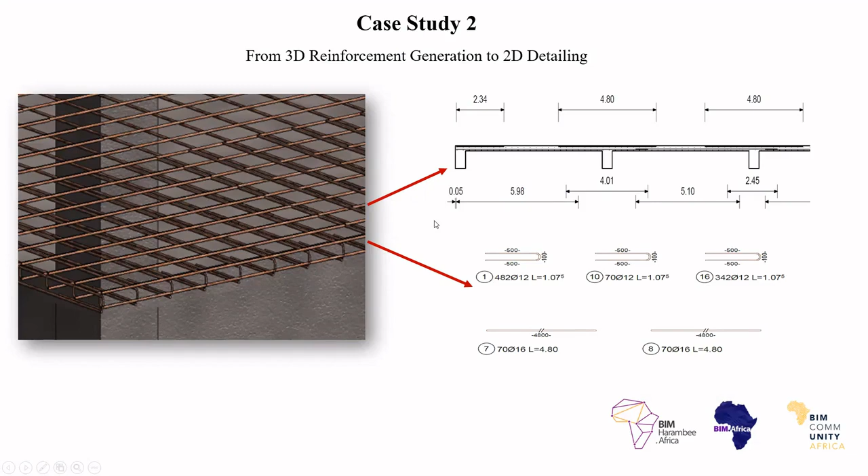Everything is synchronized. With this information, you are able to generate your documentation, your schedules, and your quantity takeoffs. Your schedules cover the rebar, the quantity takeoff, the material takeoff, what's the quantity of it. You are able to estimate how much money you're going to spend for reinforcement because you already know the total weight in kilogram.

So what we did, we got the estimation from Revit and another from SOFiSTiK, and we compared both, and they were the same. As you can see, the Revit total weight schedule gave us 8,136.86 kilogram, and SOFiSTiK gave 8,137.9 kilogram. When you compare, both are very similar. So this is what you're going to use now.

These are the kilograms of steel used. When you get to the fabricator, they give you this, and this is where they're going to do the pricing, how much it's going to cost per kilogram. If you document this and send it to the fabricators, and then send it on to the construction, you can also have this in cloud. You already know everything, you document everything. This is what BIM is all about.

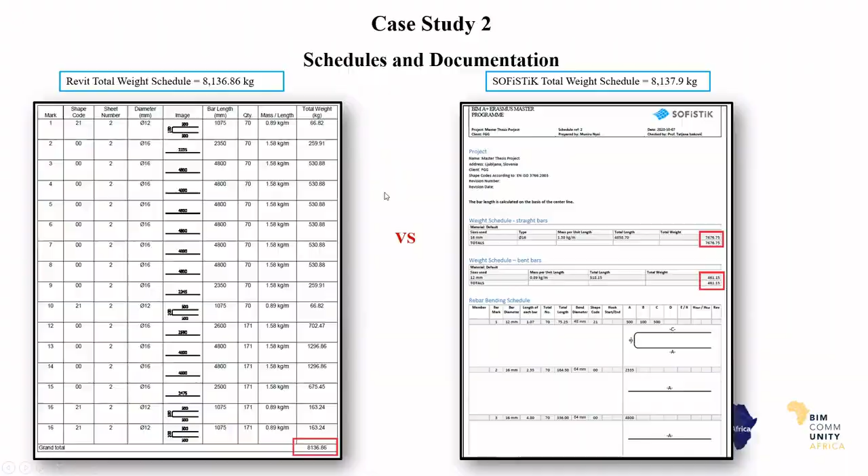So we now go to the conclusion. But before the conclusion, I would like to demonstrate a little bit of the workflow for the second case study briefly, so that you can see in real life what it is all about.

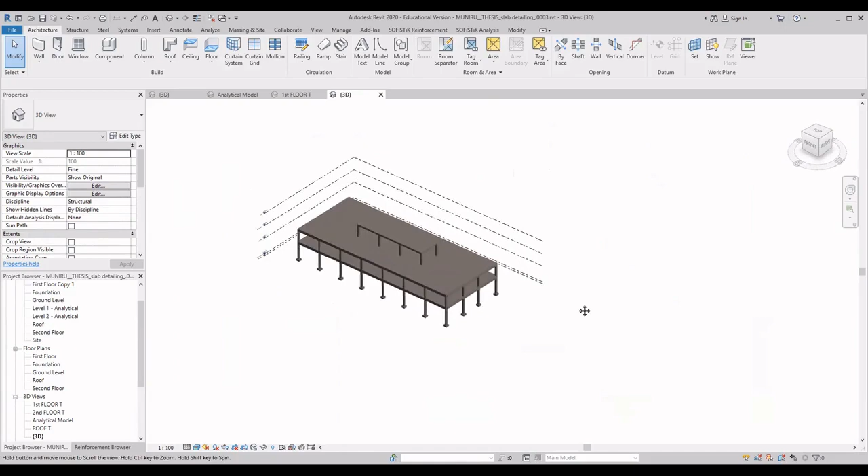As we've already mentioned, here you have it. Beautiful. This model was built using Dynamo scripting to get this model. Because there's not much time to apply all of these and run them, I wouldn't want to waste time on that, so we did some modifications in the Revit platform. As you can see, the beauty of BIM, if I click here, I can see the metadata, all of the important data of the column, they are all here.

For example, in facility management, after construction, if we send this project to the facility manager, when he wants to do a repair or refurbishment, he just needs to check this data to know which grade of concrete we used. As you can see here, the grade of concrete is shown. He also wants to know the dimension, the cross section of the column on the first floor. You don't have to go anywhere, you just come to the BIM model, as you can see here, and the additional information can be found.

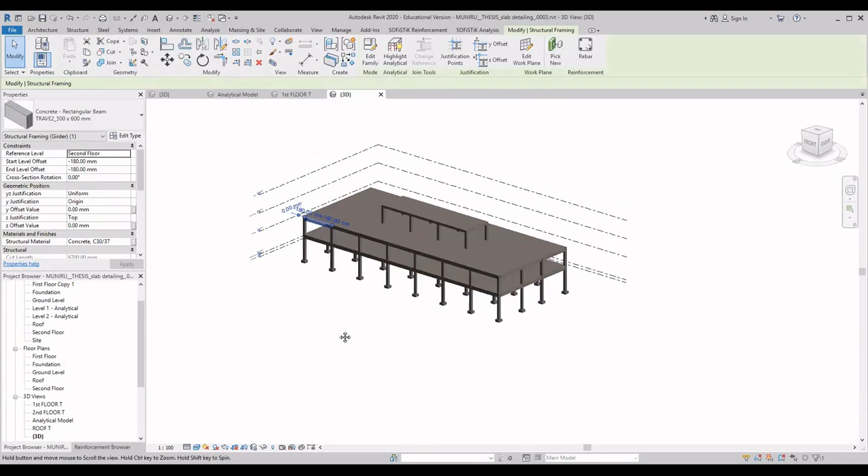Beautiful stuff. This is the essence of BIM, and that's why we say this is the central model. Revit allows you to build the central model. All of the data is in Revit, and you can move this data from one software to another, but you always come back to the original central model data. So this is the central model data here.

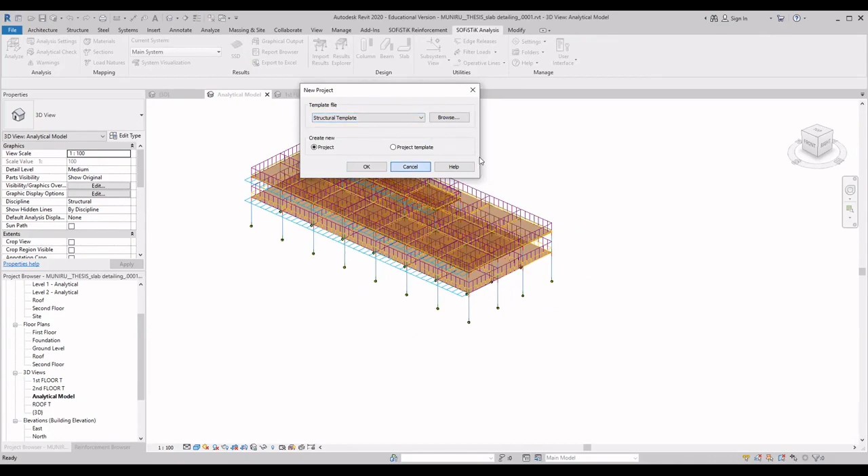Now we move to the second stage, which is the analytical model. As you see here, this is the analytical model. When you are designing or modeling your 3D for structural engineering purposes, you must activate the template. For example, when you want to create a new project, you need to activate the structural template. Only when you activate the structural template are you able to automatically generate this analytical model, and it is this analytical model that is going to be transported or exchanged to the Finite Element software program for analysis.

So this analytical model serves as a transition between the BIM model, the central BIM model, and the FEM software.

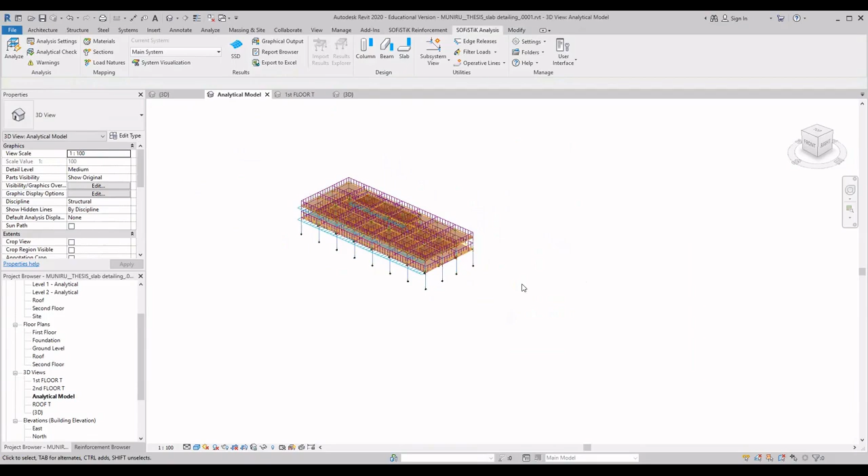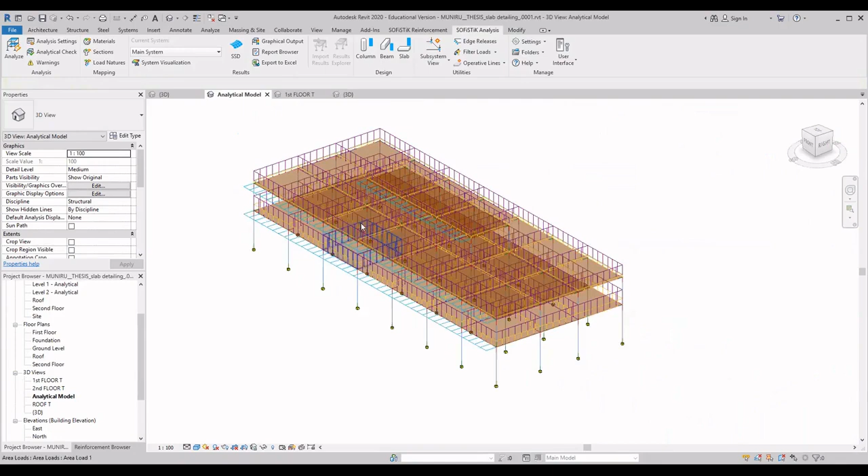So the analytical model is present with all of the loads. You can see this is how we apply the wind load to it. We took wind load from one direction, and the magnitude of the wind load is here. These are the dead loads in maroon color, and the yellow color is the live load. We have different scenarios of the live load: live load 1 acting all together, live load 2 acting alternatively, and live load 3 the same way, as you will see later. And we have the snow load here, it's very small, you're not able to see it well, but this is it, the snow load.

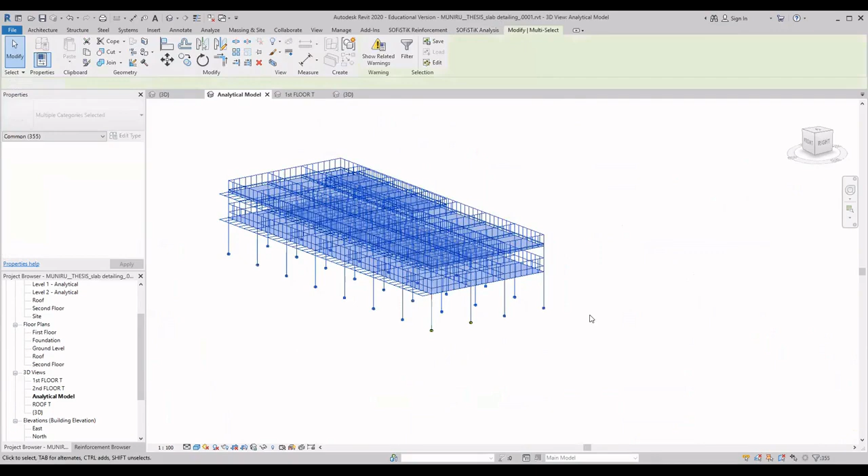So now the model is ready, it's ready to go for analysis. But we're not going to analyze the entire structure, that's not our interest. We can only run this structure, and then later select the first floor slab to analyze. I have already done that, I have already analyzed the entire structure, because before analyzing the first floor slab, I need to perform analysis of the global structure. Then I go to analyze the first floor structure.

So with much ado, I move to the first floor. We extracted this, this is the first floor. Revit SOFiSTiK allows you to do this, this is how to do that, how to extract it, it will tell you. You come here to the subsystem, and it will ask you either by level or by selection, but I'm not interested in that for now, so I cancel that. This is where to go, you can select what you want to analyze.

So we go back to our floor of interest. Now can we see some things here to verify? Now we are in the finite element panel of SOFiSTiK, this is it, it is embedded in. These are the ribbons, these are the icons we need to follow.

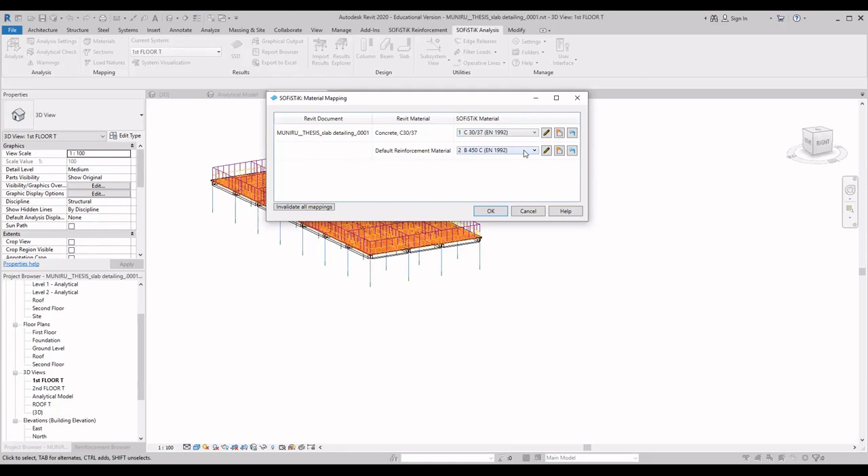So we go to material, we want to see how SOFiSTiK receives Revit material. As you can see here, the documentation carries my name, and you see Revit material, concrete C30/37, C means concrete. This is the material I selected in Revit, and SOFiSTiK receives it and interprets it exactly, it did a mapping. The same with the default reinforcement material in Revit, SOFiSTiK does the mapping, and it was correct. Simple, there's nothing much you need to do.

Okay, we go to sections, the cross section, see? Revit, SOFiSTiK.

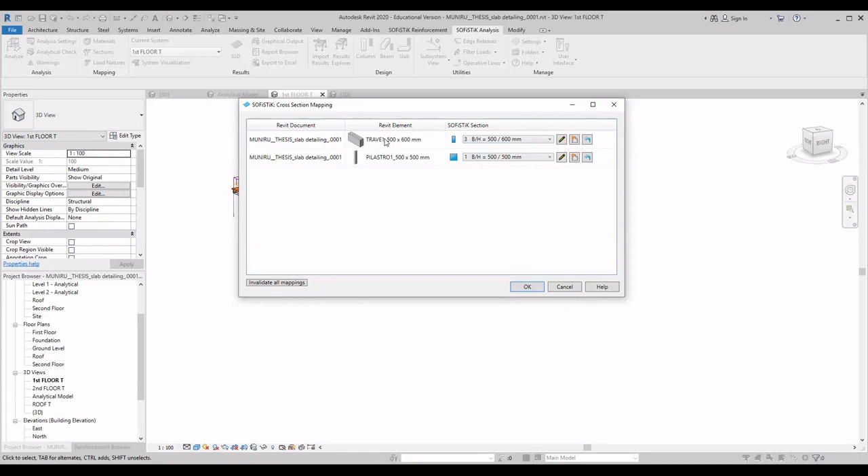Trave is an Italian word meaning beam, 500 by 600 in Revit. This is a naming convention I created myself, but the cross section is 500 by 600. For the sophistic cross section, B over H, 500 to 600, the same. Pilastro, column, it receives it the same. The mapping is perfect as you receive it, and it's been mapped correctly. You don't have to do any changes, just make sure you do the right selection and the right data input in Revit. Everything will be easily and seamlessly transferred.

Now we move to the analysis settings because we want to perform the analysis. Let me name it BIM Harambee Punto Africa. So this is the name of the analysis, BIM Harambee Africa. Now I'll come here. It's already frozen because I've already selected the Euro code, which is the EN.

If you want to select the code from South Africa, China, Zimbabwe, the American code the ACI, or the BS, the British Standard, everything - if your code is in the software, it will be here. In this case I selected the Euro codes, and because we are interested in concrete, the selection of AN Buildings has been selected.

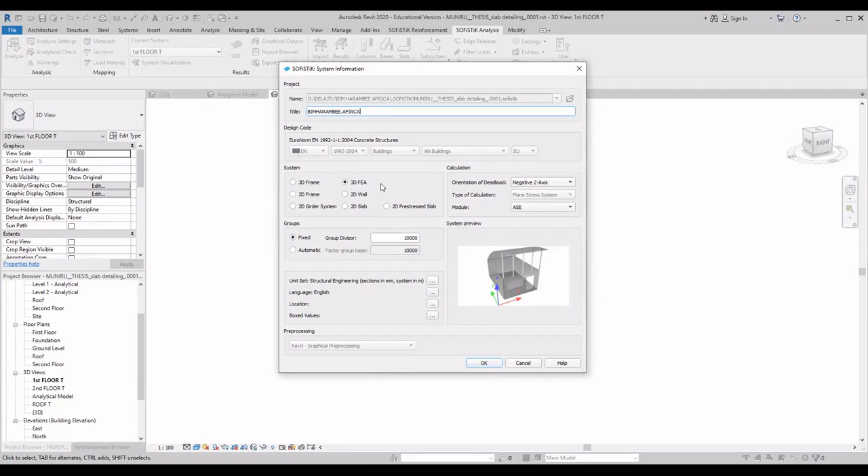This is a 3D FEA model. FEA stands for Finite Element Analysis, which is the Finite Element Modeling. So we go, here we are. And then we do the analytical check - we want to see whether the analytical component has an error. If it doesn't have an error, we move on. No error detected, good stuff.

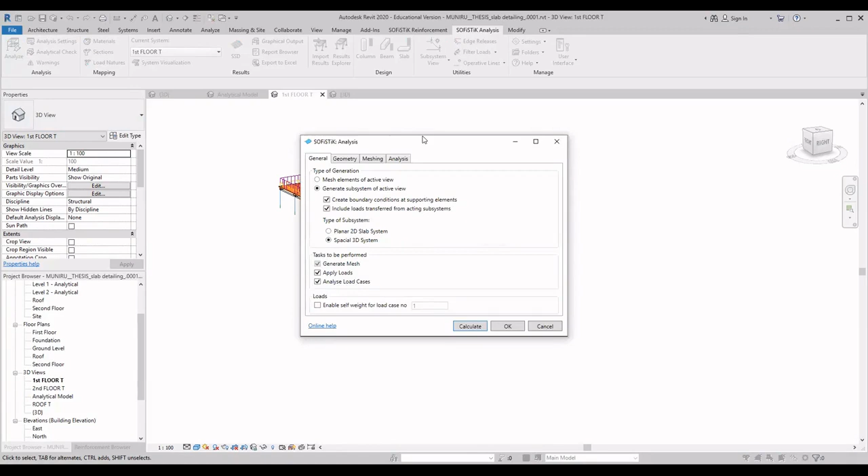Then we now go to our analysis. As I told you before, we have analysis and design. You analyze to get the internal forces and stresses, then design to size the members.

So general - the system is asking us: create boundary conditions at supporting elements, yes. Include loads transfer from the acting subsystems, yes. Spatial 3D system, yes, and apply the loads, yes. Analyze load cases, yes. And here it's asking us to enable self-weight for the load cases.

In this project we are not going to allow the finite element model, SOFiSTiK, to determine the self-weight. In my Revit model I have already determined and input the self-weight, so I'm not going to include this at all. Go to geometry, export the various - you wanted to export the grids, the levels, yes.

Meshing - if you recall earlier I mentioned the finite element and finite element analysis, you need to do meshing. The size of the mesh allows the system to perform the stiffness analysis and displacement at the nodes. So you can take 100 millimeters, 200 millimeters, 300 millimeters, or 500 millimeters, depending on the kind of analysis and the kind of results you want to get.

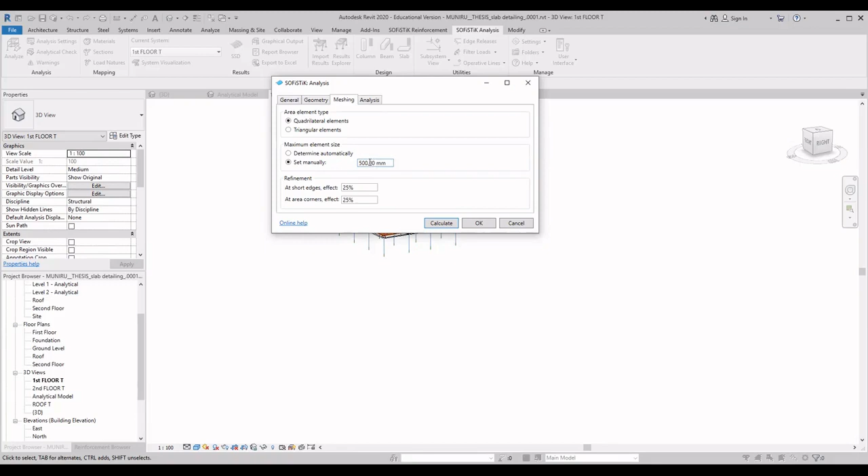Sometimes the lower the mesh, the results it gives you get a little bit slower to obtain. The finer meshes sometimes give a good result, but sometimes the system runs very slowly. So I decided to take 500.

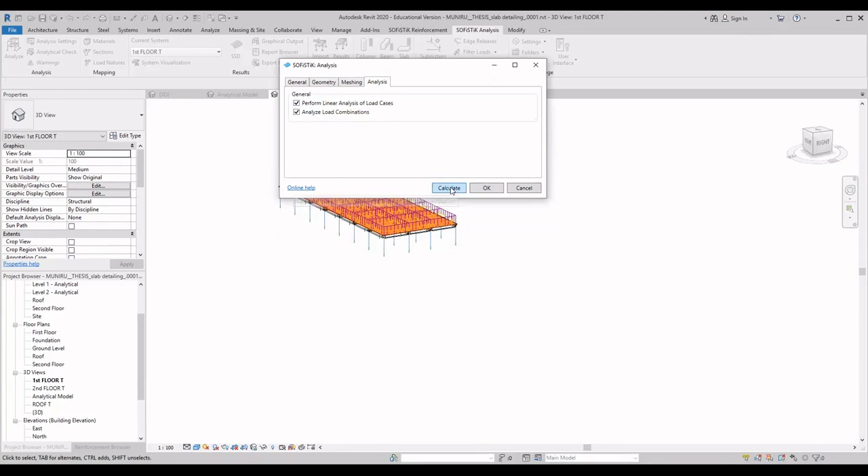And then perform linear analysis of load cases, yes. Analyze load combinations, yes - take all of the combinations from Revit and bring them to SOFiSTiK. What we do now is calculate. Okay, beautiful stuff, calculation is complete.

Now we've already calculated, we have already done the analysis. So the next step is we go to the design, which is here. SOFiSTiK SSD means SOFiSTiK Structural Design Desktop, or SOFiSTiK Structural Desktop. We click on this and the desktop opens. This is the desktop open, and we now have this desktop.

What I need to do now - this is the analyze part. I'm not yet ready to do the design, I would just like for you to see how the stresses are. For example, let's go to the load combinations, the load cases.

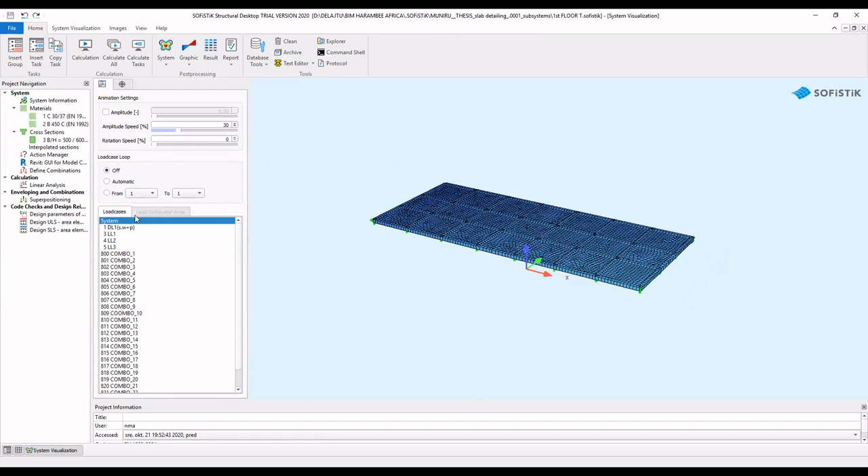As you can see, directly we imported in Revit, and it appears here in SOFiSTiK. The dead load, you see the dead load action; the live load, you see live load 1, live load 2, live load 3 - live load 3 is alternating. And we consider load combination 1, where you combine all of the loads.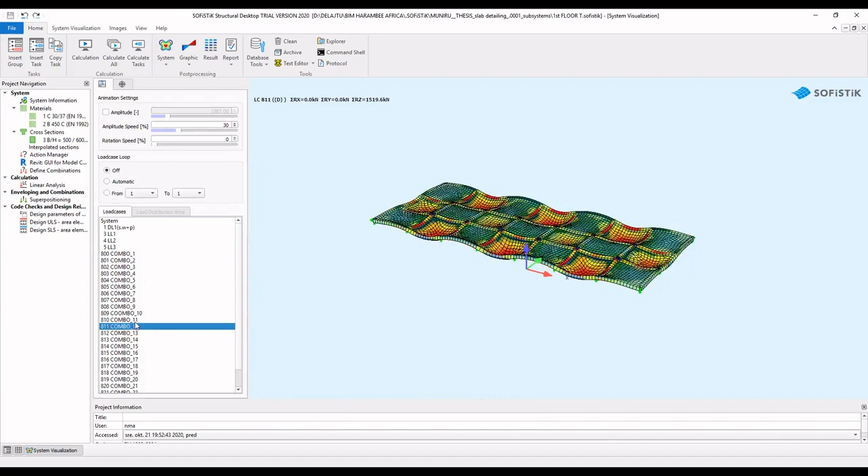From my analysis, the worst combination was... no, the worst combination was combination 3, combination 1 and 3. So that's where we base the design on.

Now we go to the design part of Revit - code check and design reinforcement of concrete. As you will recall, I told you we have two limit state conditions in design: the ULS, ultimate limit state, and SLS, serviceability limit state. In this case of this project, our focus is on ULS.

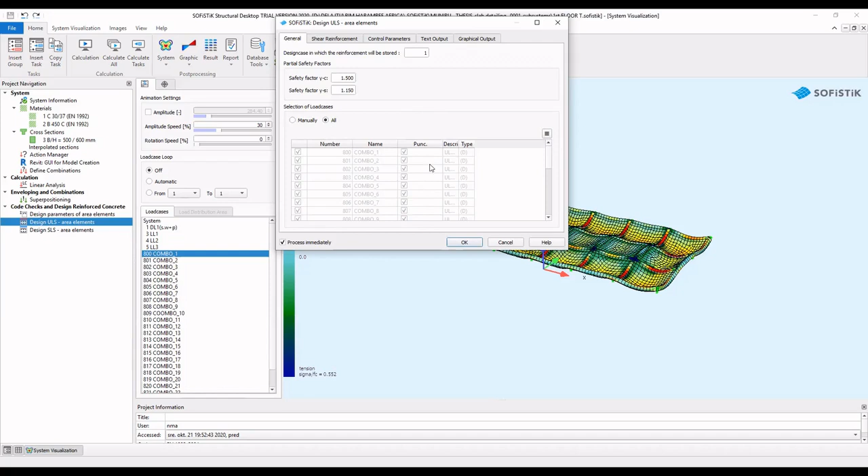We are going to design the combination based on the ultimate limit state. We don't have to follow all of these because it's just a case study - you can do manual import, select the one you want, or select all. So calculate. The calculation is performing, the system is being designed, and the design is complete - the program has ended because the design is complete.

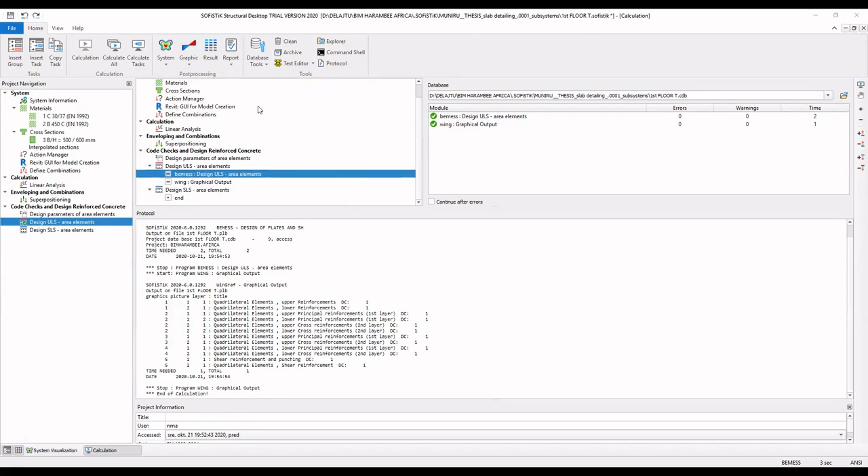When we are done with the design, you might want to see the result or question the result. What are the results? We come to report - design ULS area elements. So here we are, these are the results.

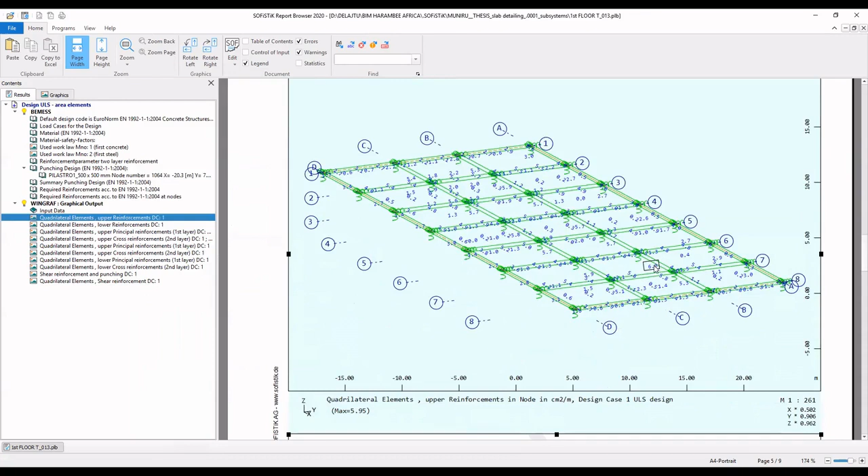Let's go to upper reinforcement. As I told you initially, this is it - the maximum reinforcement area is 6 centimeters square per meter. This is the reinforcement area, always measured in centimeters square per meter. If we go to the lower reinforcement, it's almost around the same.

You can question the result, all kinds of internal forces, from here. I don't want to waste much time here. From this point, this is the same interface, but now we are in the SOFiSTiK component. As long as we save the result, it's going to go back to SOFiSTiK. So now we move back to SOFiSTiK to do reinforcement detailing.

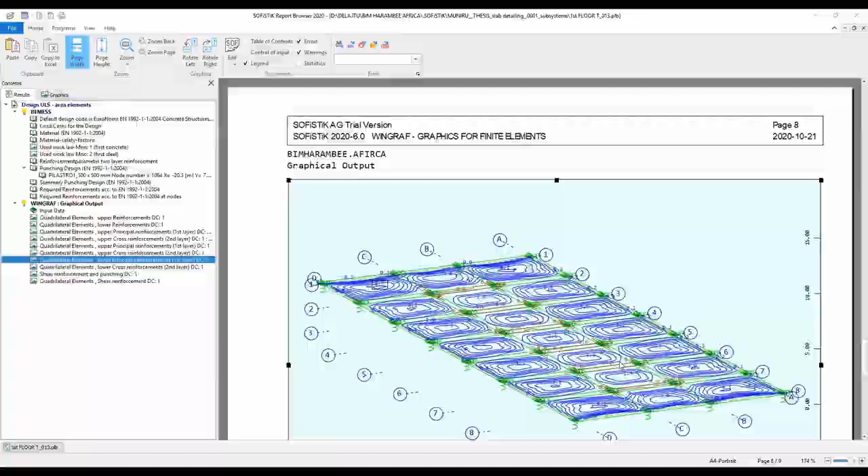So we go back. Here we are now. What next do we need to do? We now need to do a reinforcement. The system has already been designed - it's already done the calculation of the internal forces and the kind of reinforcement required. We now need to input based on our results.

So we go to reinforcement generation, SOFiSTiK reinforcement. Create - now we come here and you see BIM Harambee Africa, the data we've already done. Design case, it was one load case, ultimate limit state, and then it tells us to select the model component. We select, come here to select, finish. And then, as you see, the slab - now you see what we were talking about, the selection I showed you in the presentation. This is top reinforcement exterior.

Because this is a case study, we just took the maximum reinforcement area and designed the entire slab - the bottom, and we put the bottom reinforcement and the top reinforcement. They were all based on the maximum situation because we didn't want to do detailing, so we just look at one situation.

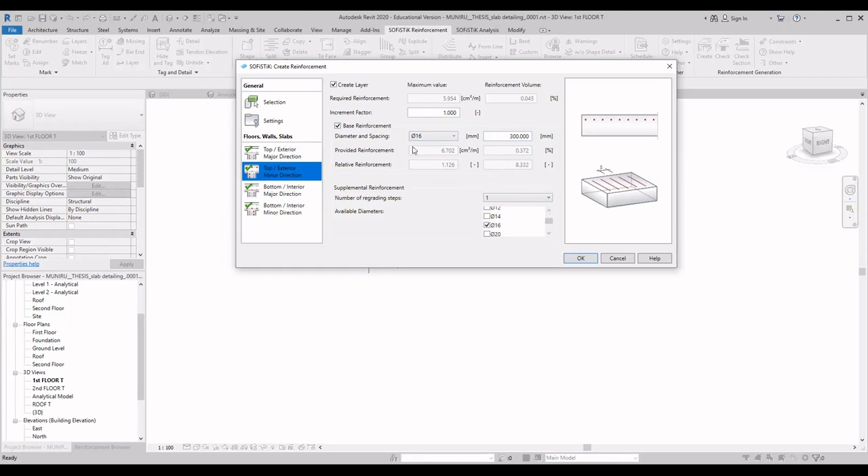So the top reinforcement, our selection was 16 diameter - 16 millimeter, with a spacing of 300 millimeters. As you can see, we go here, 16 diameter. Top reinforcement, the same - we import. Bottom reinforcement, the same, until you complete everything. As you can see, this is really good.

Some years ago, 5 years ago, when we used to study structural analysis, the calculation would never take you to this level. You just do internal forces design, and then manual calculation of the reinforcement spacing and everything. But now everything can be done just from one interface - you can do everything. But now this is where the judgment of a structural engineer comes in.

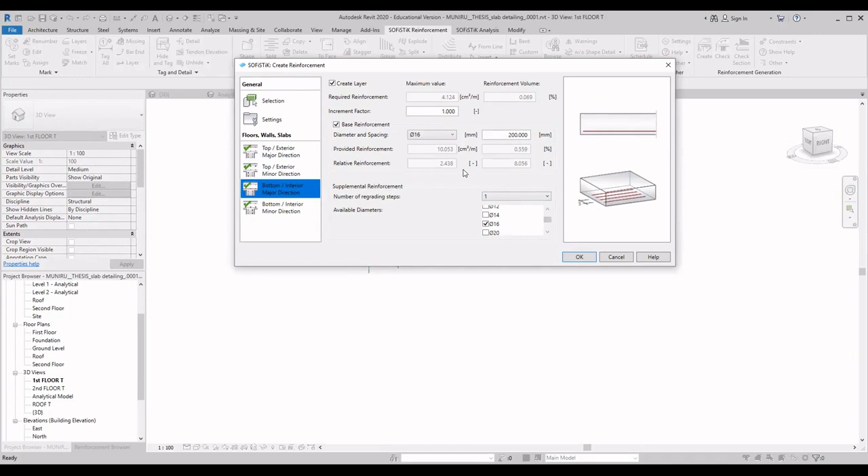Having determined all of your internal forces and you already know your reinforcement area, you are able to say: since my reinforcement area is, for example, I obtain a diameter, the area of my reinforcement is 6 - I selected 6 point something. You have provided reinforcement 6.7 and the required reinforcement.

So the reinforcement provided is more than the reinforcement the system is requiring. As a structural engineer, you are able to question all of these things. This is not just about BIM. That's why we mentioned in our conclusion, for BIM structural engineering to take place, the designer needs to have

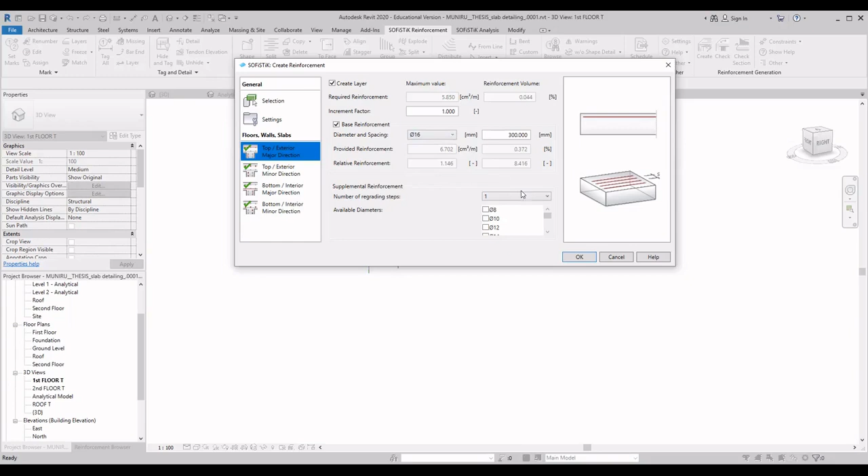really good knowledge in structural engineering so that the work can really flow well. From there, we can say okay, but no need to say we already ran this, and you can come to your reinforcement. As you can see here, the reinforcement are all done here, with the spacing required. Everything is done. Later on, you can question this again according to the code.

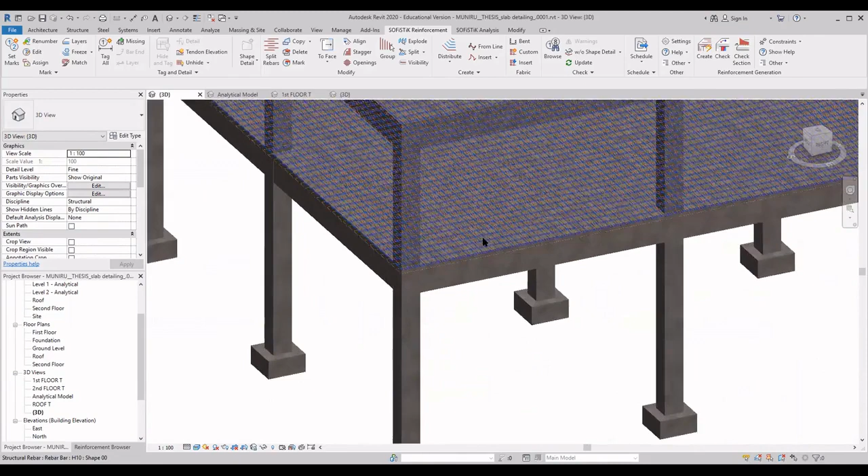Euro code has specification when you do the reinforcement, how to do the lapping, how to lap the reinforcement, how to anchor the reinforcement from one structural element to another, from the beam to the column, how to do this anchorage. Everything is defined in the code. You have to go according to that.

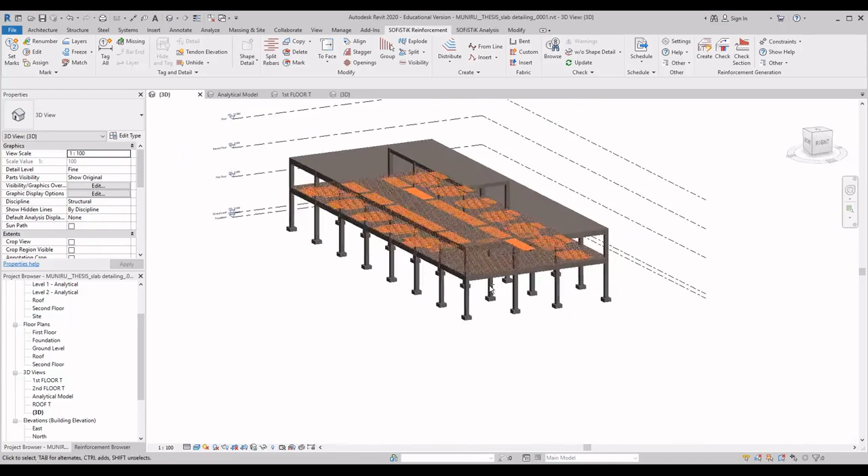What the software does, or what it just done for us here, is that it only makes your work easier. It automatically computes all of the reinforcement required based on your area of reinforcement. So it is you now as a structural engineer or BIM modeler to put this into context, into real structural context, following your code, whether it's American codes or Euro codes. And then when you are done, you compute, you do the documentation, and then you do the 2D reinforcement as we mentioned.

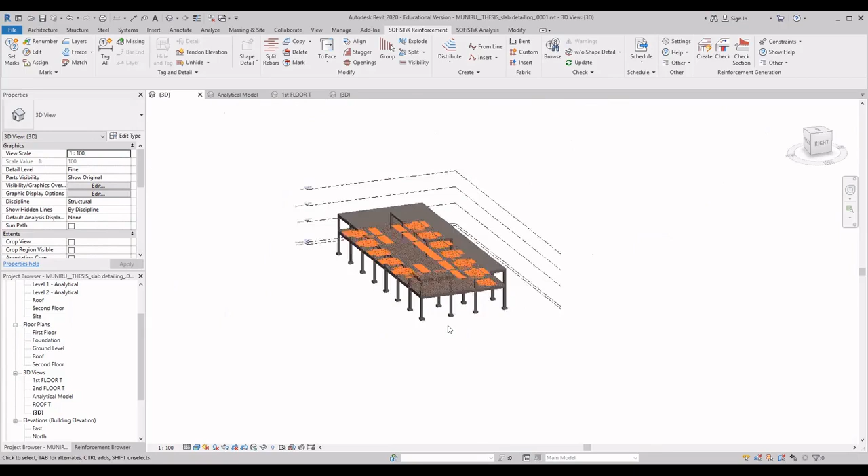One interface, multiple analysis. What all used to be difficult before, everything is now simple, and pretty much we are done with it. And that's it. And then the next stage, we move to the conclusion.

The study is done, and the intent of the study, we identified 3 key levels of interoperability or data exchange methods available to BIM structural engineers. With these methods, we also validate the direct link interoperability as the most effective and efficient method for exchanging data between BIM authoring tools and an FEM software.

As you can see in the analysis I have done all over, it's really powerful. And the correctness of data exchange between Revit and the 3 FEM software shows Sofistik 100%, RFEM 90%, SCIA Engineer 88%, which is a very good outcome.

And we were able to test the effectiveness of Revit Sofistik interface in providing the full structural engineering BIM workflow. From modeling to analysis, design, detailing, documentation was tested and validated in the second case study, as you saw. BIM in structural engineering for interdisciplinary coordination, documentation, and analysis and design.

BIM in structural engineering, the benefits, to recap: you have productivity, coordination and consistency of data, visualization and simulation, documentation, analytical model, downstream innovation, etc. Some challenges, of course: time and resources, too much knowledge required, analysis being a problem.

Structural engineering BIM workflows also enable users to customize their workflow that is convenient and able to follow through, easy to assess, query, and audit your model. It's always good to have a BIM workflow for a structural engineer, and we mentioned a couple of them in this platform. It is also very important.

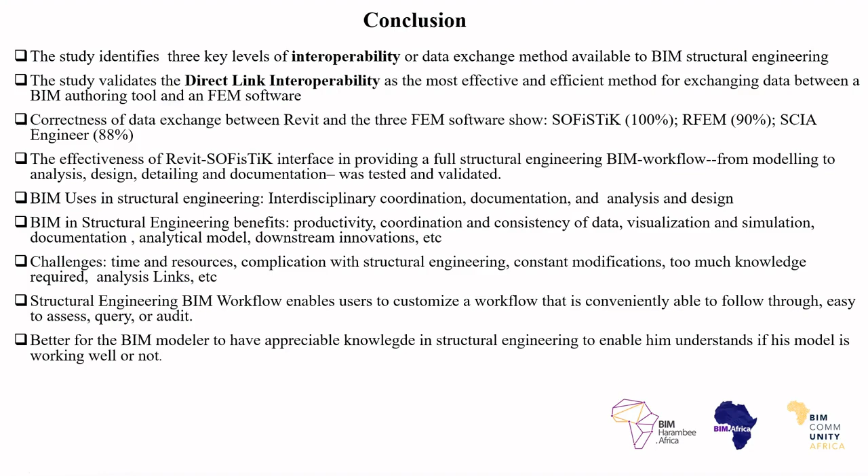It's very important at the concluding point that your BIM modeler, or the guy in charge of the structural BIM model, should have appreciable knowledge in structural engineering to enable him to understand if this model is working or not. Otherwise, at the beginning of the creation of the model, when there's an error, it's going to affect the whole process. And that means BIM is no longer important, because the essence of BIM is productivity. So if you have a wrong model in the end, it's all over.

So this is the conclusion. This is where we are.